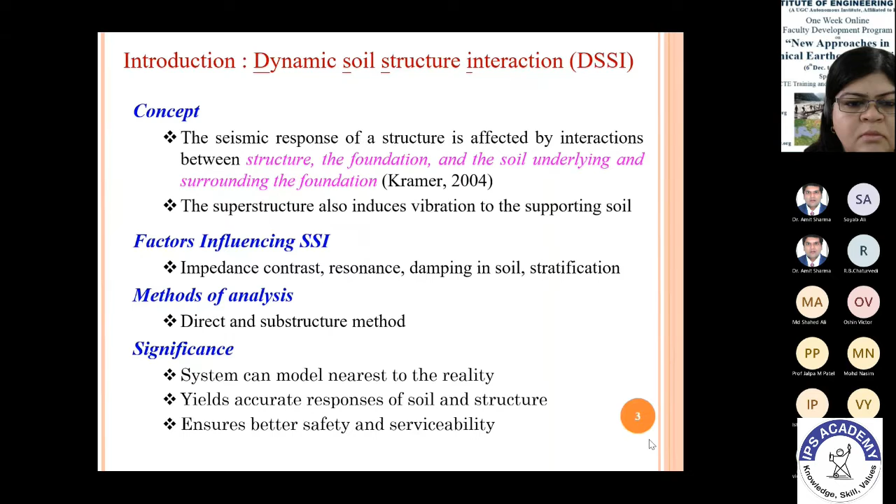The top floors failed because of the inertial effect. This is the same earthquake as the Hanshin Expressway case, a classical example where the effect of soil-structure interaction can be seen very distinctly.

Mostly medium height structures of 10 to 12 story buildings on soft sediments were affected, where the period increased from 1 second to 2 seconds. The structures could have performed well at the 1 second period for which they were designed, but when extended to 2 seconds, they could not perform well.

That means the wave characteristics changed, so the duration in this particular event at that location, because of the interaction with such soil, the duration parameter of the input ground motion increased, not the amplitude part.

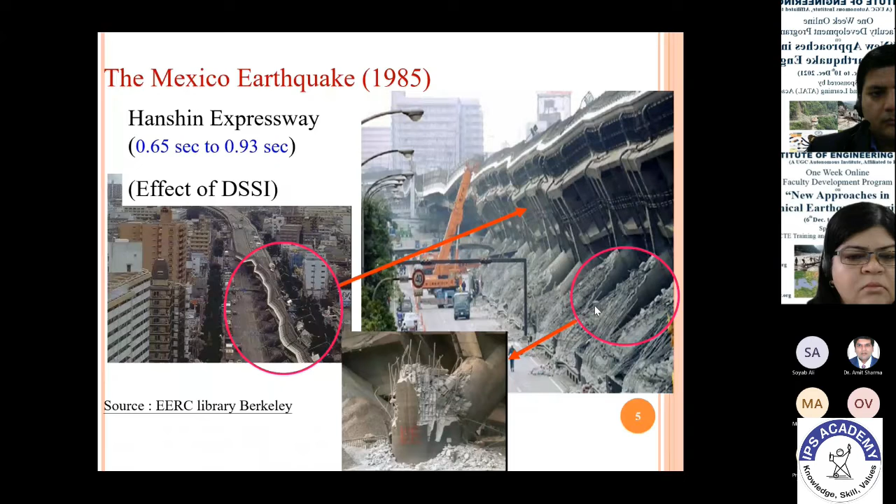The Kathmandu Valley is another classic case for damage studies, not only for asymmetrical structures but also for topographical features. Structures on the crest portion of mountains or hills had moderate damage, whereas structures in the valley portion had severe damage.

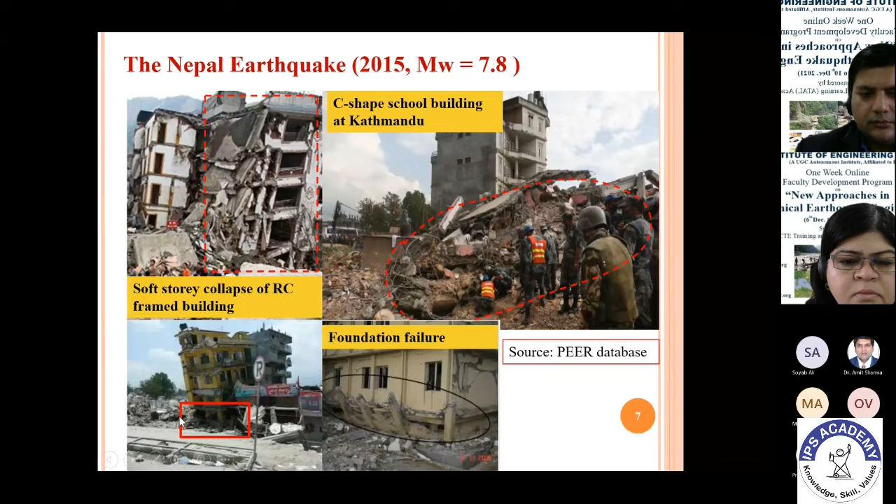These are structures in the Kathmandu valley part. This is a soft story collapse of an RC structure. You can see the kind of damage it had, how the foundations failed, and complete collapse. This is a school building, again in a C shape, with soft story failure of the frame structure. So this is up to the superstructure part.

Let's see some of the failures, especially with pile foundations. When we have soft sedimentary strata, people go for deep foundations, like pile foundations or pile raft foundations. So let's see how the piles behave.

During an earthquake, there's vibration in the foundation, and after that, gap formation occurs. This is a simple thing - even if you take a small pencil and put it in clay or any soft strata, then do some lateral displacement on top, after a few motions, if you leave it, there's a gap formation. So after an earthquake you also get this kind of gap formation.

If a gap is formed, the pile is not in contact with the soil. When the pile is not in touch with the soil, how do we transfer the load? Mostly these piles are friction piles, because in areas with thick or soft sediments, where we expect soil amplification or other geohazards, bedrock is very far, so these are mostly friction piles.

So you see here, these are not columns, they are piles. You may be surprised what happened to the soil around, because the pile should be embedded in soil - it has been completely washed out due to lateral spreading. It is liquefied, and because of topographic variation, the material has been completely washed away, causing these kinds of failures in the foundation.

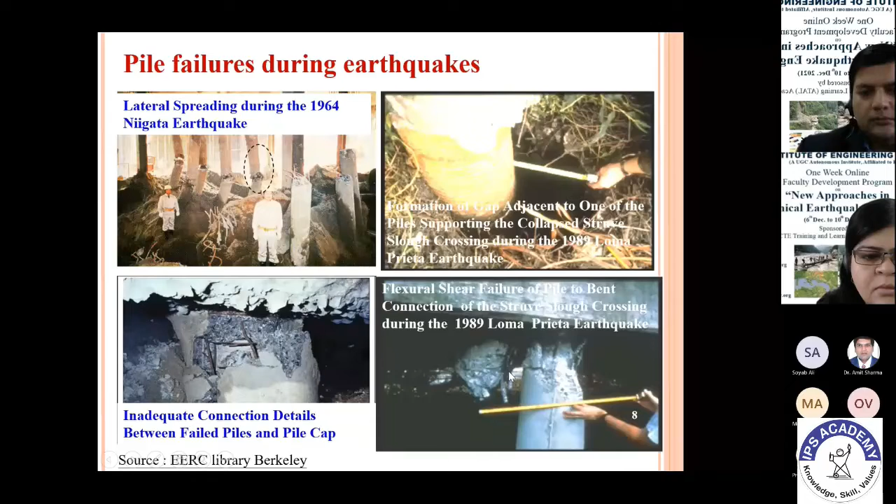So the problem here - we've seen failures for the superstructure, especially asymmetrical ones, and we've seen it in pile foundations. What we're trying to do is study how these asymmetrical buildings supported on pile raft behave, because pile raft is something we don't have an IS code for right now.

We follow Poulos's papers or book for design, but it's being very fast adopted in the country for high-rise structures, because it saves a lot of money by taking advantage of both types of foundations. The raft is mostly load bearing, and the pile is a settlement reducer. In such soils, we may have differential seismic settlements, which can be handled by piles. And since there's a lot of inertial forces due to seismic activity, that can be handled by the raft. That's the advantage of the pile raft foundation system.

To address this problem, we considered an asymmetrical building, specifically geometrical asymmetry, since these are common types of asymmetrical buildings built in most areas, especially in Gujarat, Delhi, or other seismic areas. We considered these foundations on pile raft, and started working on understanding the behavior with different kinds of soils, layering, and soil properties, especially shear strength parameters and earthquake ground motion. We looked at the most controlling factors in the overall response of this dynamic soil structure interaction problem.

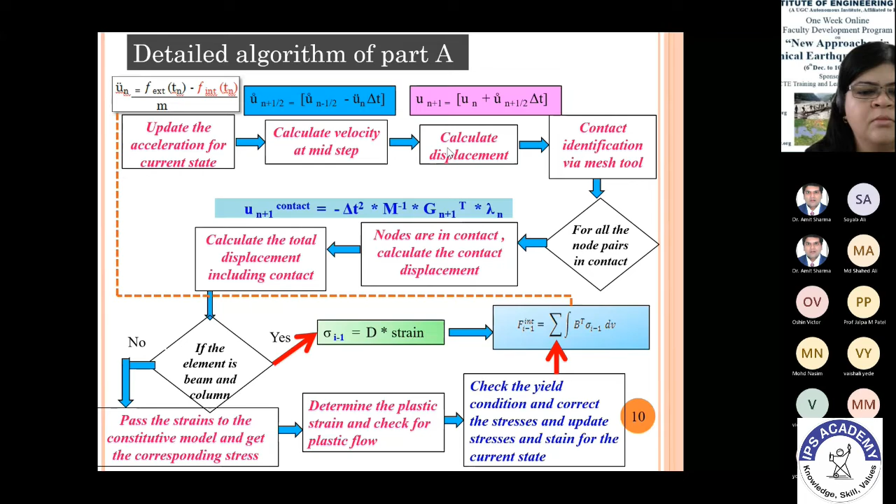So coming to the details of the numerical model, we used 8-noded brick elements for the raft, soil, and the pile, and 2-noded beam elements for the beams, columns, and the superstructure.

Coming to the modeling techniques, we use node-to-node contact at the column-raft joints. Columns are completely embedded in the raft, which acts mostly as a rigid connection. For the soil, as I said, we considered absorbing boundaries, wherein a wave passing through will not have any reflected part of it. It just passes by, because waves are passing through any boundary.

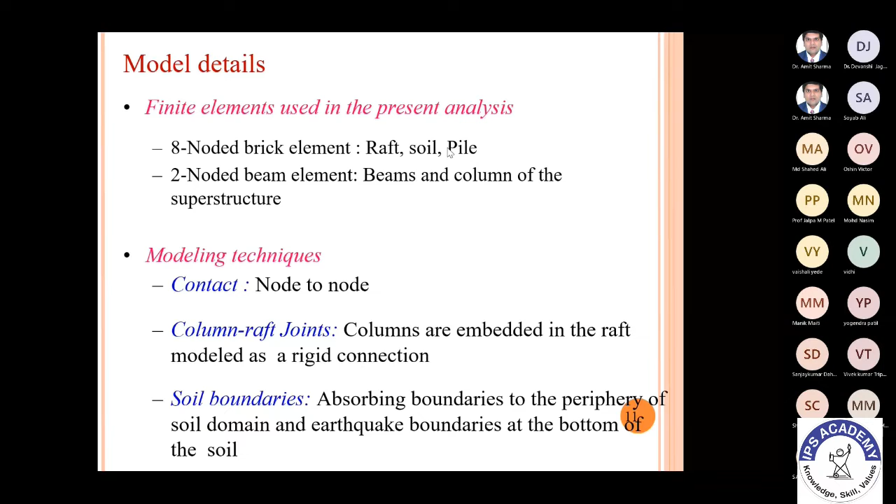If you don't consider it as an absorbing boundary, there is a possibility of reflections, and the reflected part of the wave can come again. So to make the problem simple, we generally assume it as an absorbing boundary. And then this is how the program works.

You give inputs in text files, like geometry, nodes and elements, contact details, boundary conditions, material properties, and constraints. Then load data with respect to degrees of freedom, and then it goes into the analysis, so that properly it can be plotted.

As I said, when you develop any numerical model, without validation it is of just no use. So validation is such a crucial part. We did validation using the already available data from the literature.

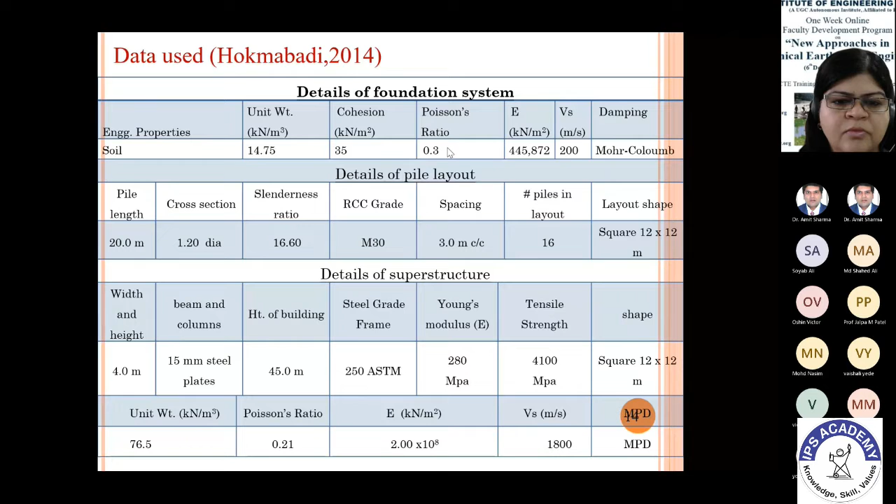Hokmabadi did both experimental work using a shake table and numerical work using FLAC. These are the data details of the different things he has taken, like foundation details, engineering properties, and the piles and superstructure details. We have considered the same thing from his published work.

This is our finite element model for validation. He has used the same 45-meter structure which is on a pile foundation. So this is the details of the structure, and we model the same thing which he has done. This is actually the scaled down model that he used in the shake table test.

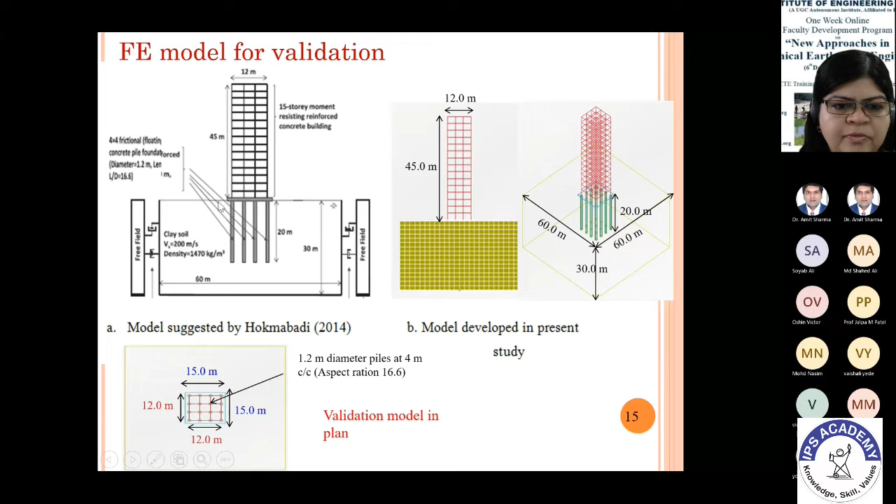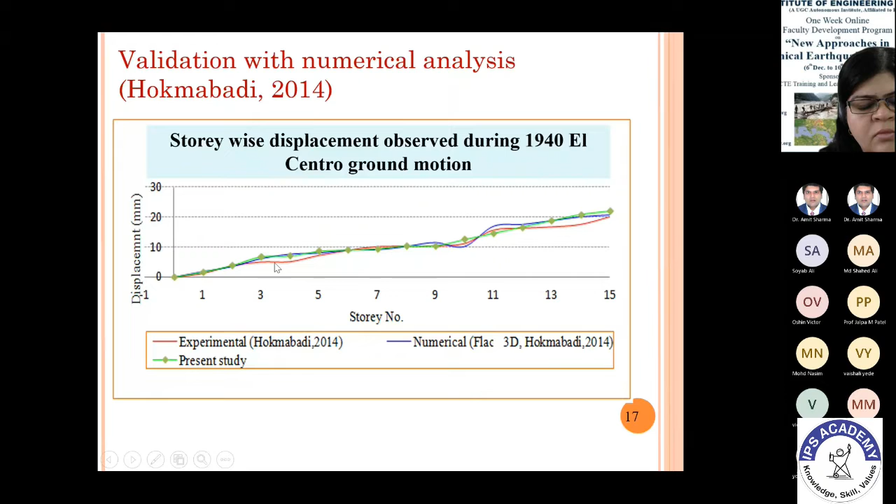These are the comparisons or validations which we have done with our finite element model against the available literature, which used FLAC as well as the experimental part. So this is our finite element model shown here.

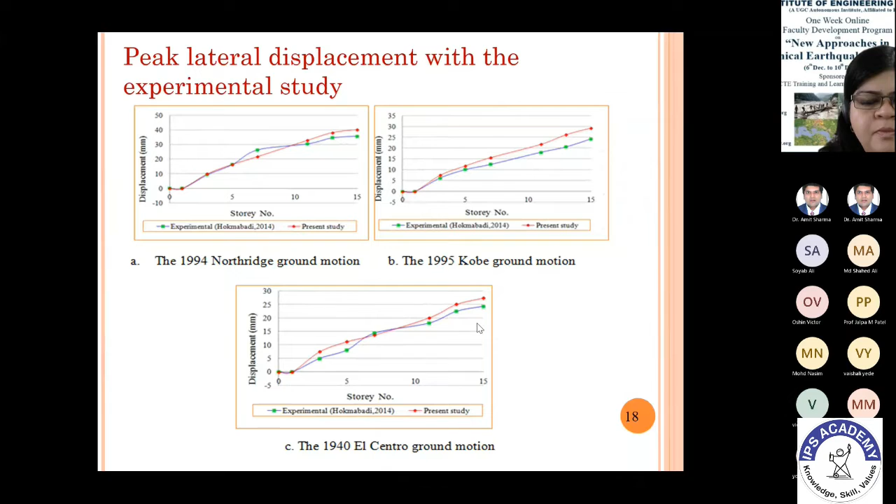So this is for the different ground motions. We try to compare the experimental versus our study, showing the different ground motions, because we just want to understand the validation. When you want to carry out validation, you have to consider all the parameters the same as they have done in the experimental work or with FLAC.

Then lateral displacements with our study—this is a comparison of the displacements with respect to their experimental and FLAC analysis. When we see that experimentally, our code has almost 10 to 17% variation, whereas numerically it was just 5 to 8%.

So it was very much acceptable. This is actually with the commercial FLAC, so we thought it's fine. The only drawback at that time was that the computation time was very huge. It was taking so much time for one model to run. That was the major drawback we had at that time.

Anyway, to start our own work after validation, we started with three geometrical asymmetries: L shape, C shape, and T shape. And for comparison's sake, we considered a rectangular building, which is generally common. All the structures have the same plan area, 27 square meters, and a 10-story height.

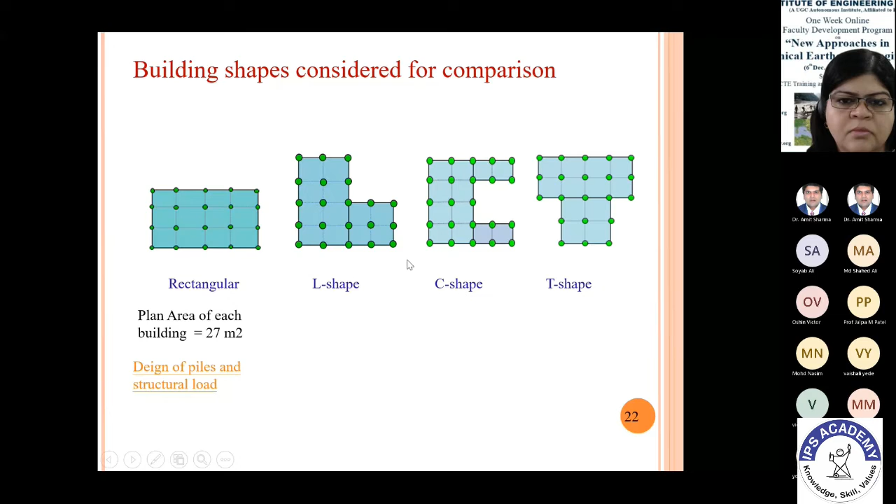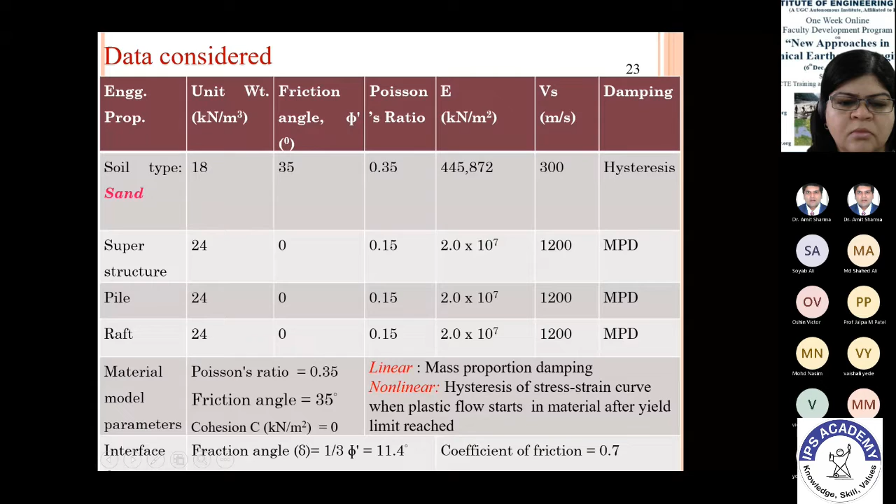Then we wanted to start with our Bhuj earthquake. But the full Bhuj earthquake we can't give because, as I said, the computational time was so much. So we considered only the major part of the ground motion, because the model takes a lot of time. If I give the entire ground motion, it takes so many cycles, and it takes a lot of time for the analysis to complete. So we gave only 15 seconds of the predominant ground motion as input, and started the analysis.

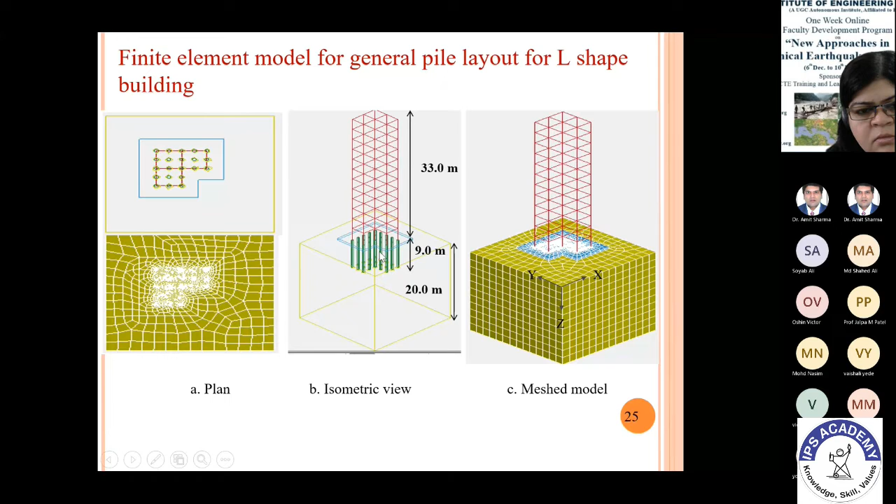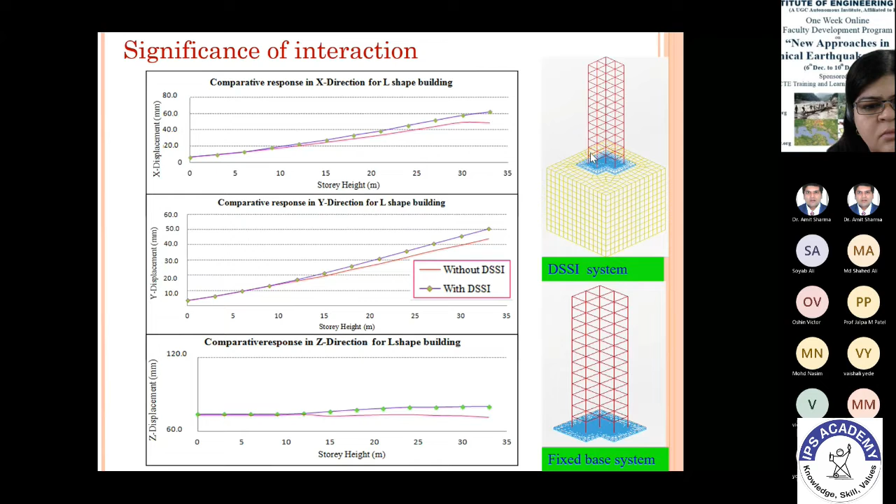This is for the L building. You can see here, as I said, a 10-story height; we designed the piles for it and then started the analysis. Similarly for the T and C also. To start with, we began with the general case, without any SSI, the fixed base condition. Obviously, there is a difference, so we have to carry out SSI analysis.

When we did this for response comparison, we considered the L-shape building and started noting the X, Y, and Z displacements at different nodes in the building at different story heights as well. This is at the top of the structure at a particular node. At different nodes, we try to see the response so that we can understand which is the more critical node in a particular building.

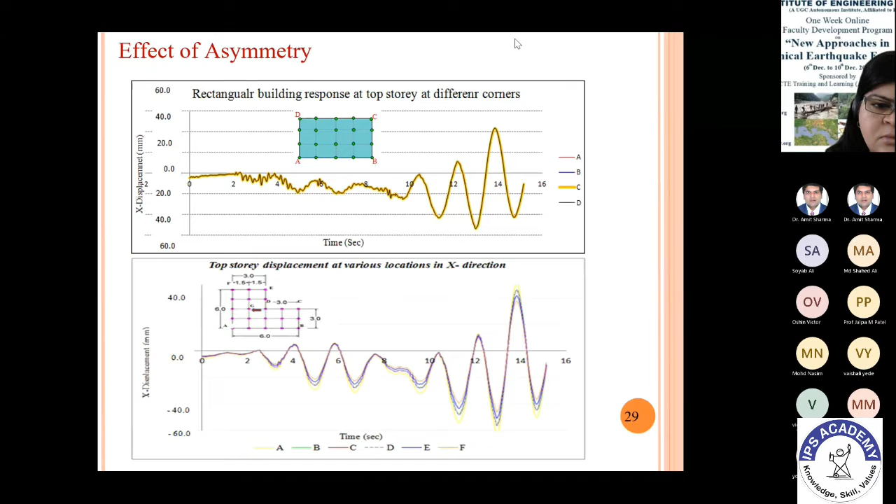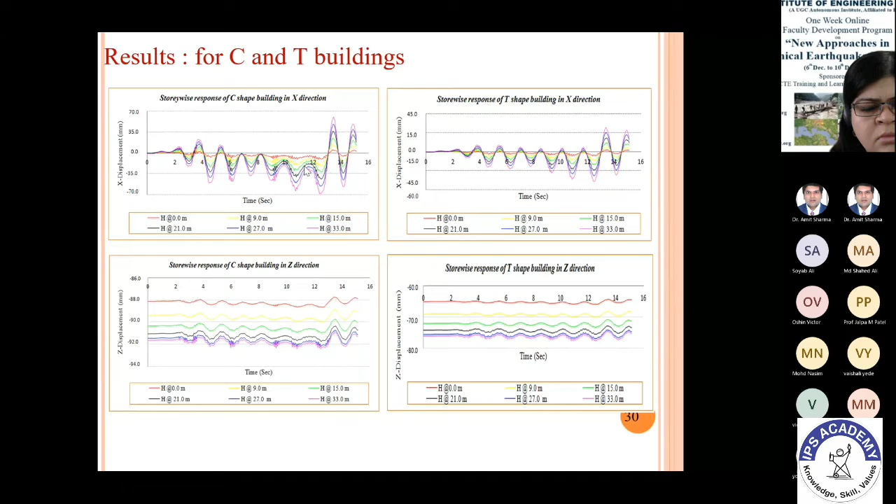So many results are there because we started comparing the responses in all three directions at different nodes and different story heights. You can see here, this is for a C-shaped building in the X direction at different heights, from the ground floor to the top floor, showing how the X displacements vary. We tried to understand the overall behavior of the superstructure under these particular conditions of analysis.

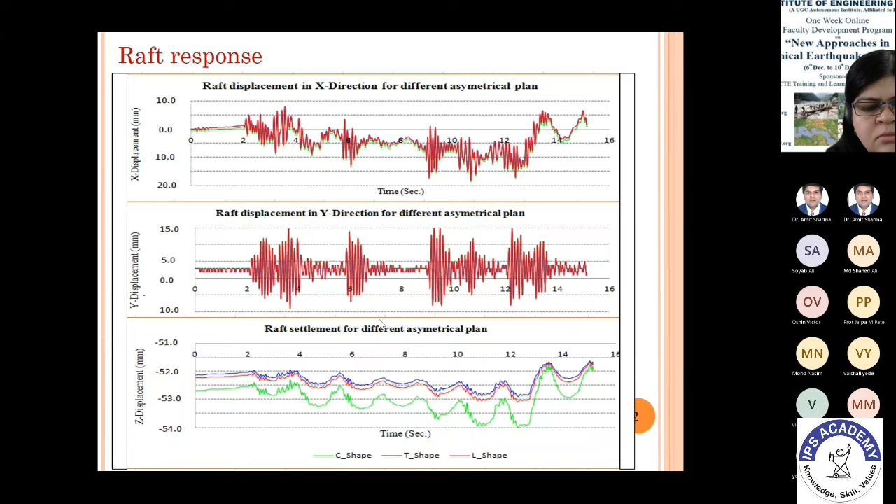For the pile response, we looked at the connection between the cap, that is the raft, and the pile, which we call the pile head, the center of the pile, and the bottom part of the pile. We want to see how the displacements vary along the length of the pile in all three buildings. This is for the C. We can also calculate the settlements.

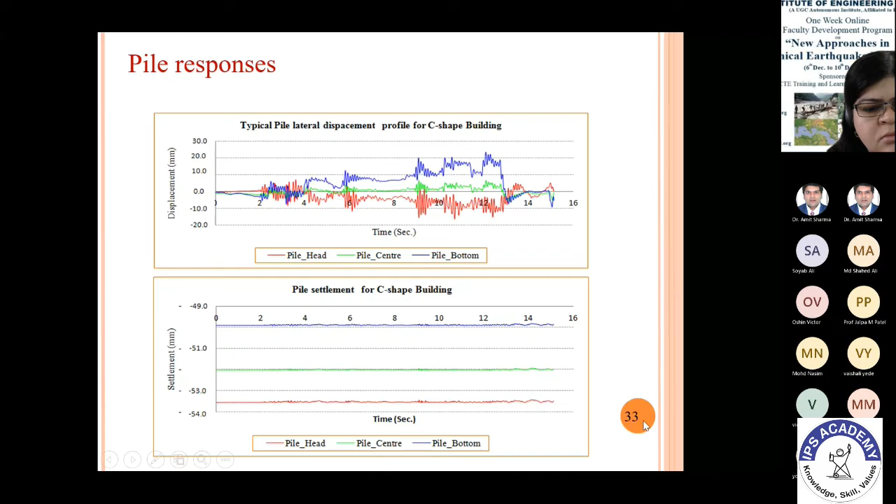So to conclude from the first part of the analysis, the numerical code or the implementation of this DSSI problem is really very challenging. I think the student has really done extremely well in developing her own model.

It was very challenging because we need to incorporate several complexities, like interface effect, which we have adopted in our model, earthquake and viscous boundaries, structure-foundation joint treatment, and soil nonlinearity through the material model. So we could consider all the complexities that are involved with the DSSI analysis.

That's why the code results are very close to the experimental or the FLAC analysis in the validation part. The validation showed variations ranging from 6 to 12% maximum, which is very much on the safer side. We conclude that the proposed numerical soil-structure code is a valid method for simulation with sufficient accuracy with acceptable limitations.

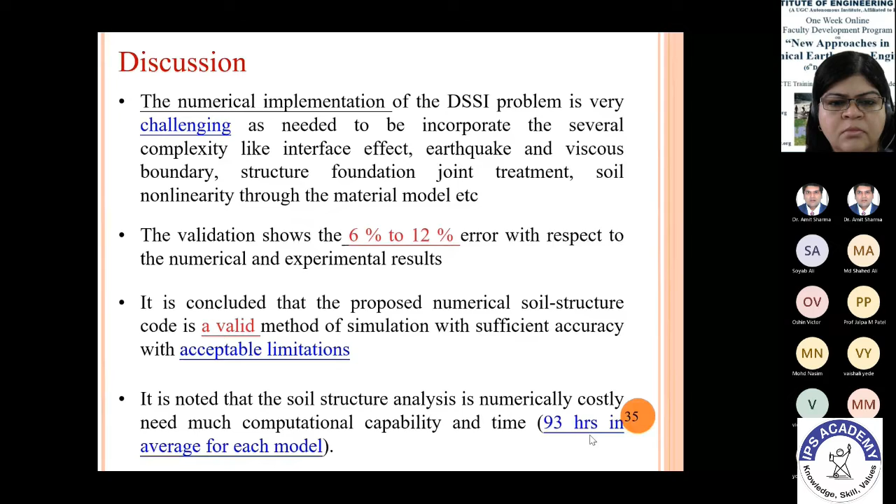We also observed that it takes so much time; the computational capacity was not that high. As I said, initially it was taking 93 hours just to run one model. You have so many different combinations to run that we cannot complete the work in 3 or 4 years. So we decided to improve the computational efficiency first. I'll explain how we have done that.

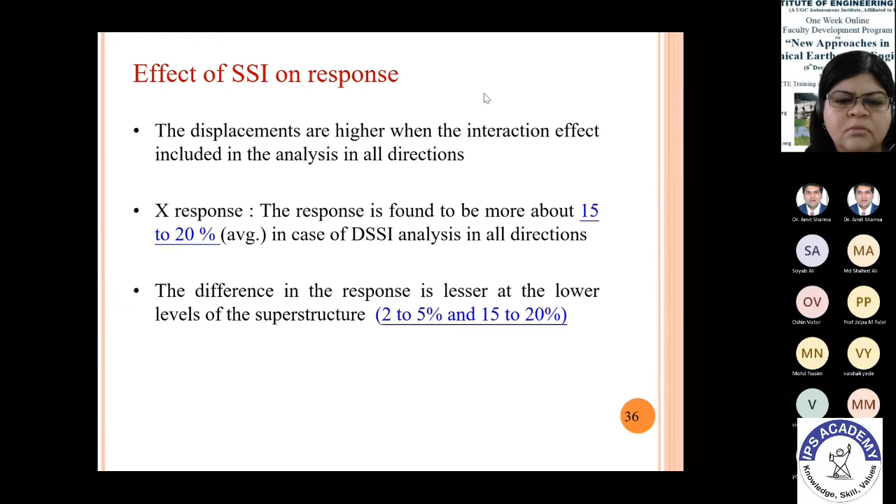Displacements are higher when the interaction effects are included in the analysis in almost all directions, obviously, because we have considered the overall effect of the soil, substructure and superstructure. The response is found to be about 15 to 20% more in the case of DSSI analysis in all three directions. The difference in response is lesser at the lower levels of the superstructure compared to the top layers at critical nodes.

Coming to the effect of asymmetry, the rectangular building shows lesser response compared to the asymmetrical ones, obviously, because symmetry plays a major role in seismic resistance. The C buildings have higher response compared to the rectangular, and the L and T buildings are also higher by almost 20%. The foundation lateral displacements and settlements are nearly the same for all the buildings under the same earthquake load. This is one of the interesting observations.

Irrespective of the superstructural asymmetry, the foundation lateral displacements and settlements do not show any variation. I think this is one of the very good outcomes of this analysis. The structural hazards are more associated with the structural asymmetry, whereas the foundation is not responding differently for different superstructure asymmetry.

As I said, the code is taking a huge amount of time, so we need to improve its efficiency. There are n different numbers of piles that we got after the design of all the 4 different structures. So we want to adopt the equivalent pier method, proposed by Poulos. It says you can consider a single pier which is equivalent to the n number of piles supporting a structure.

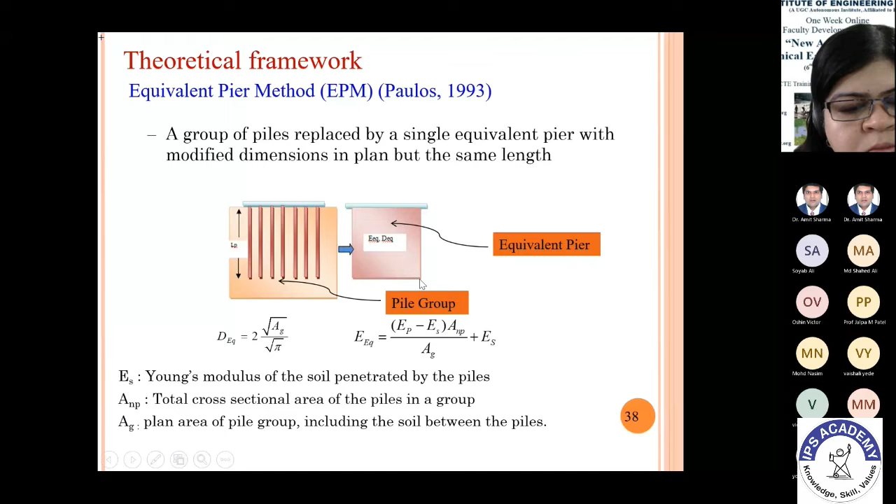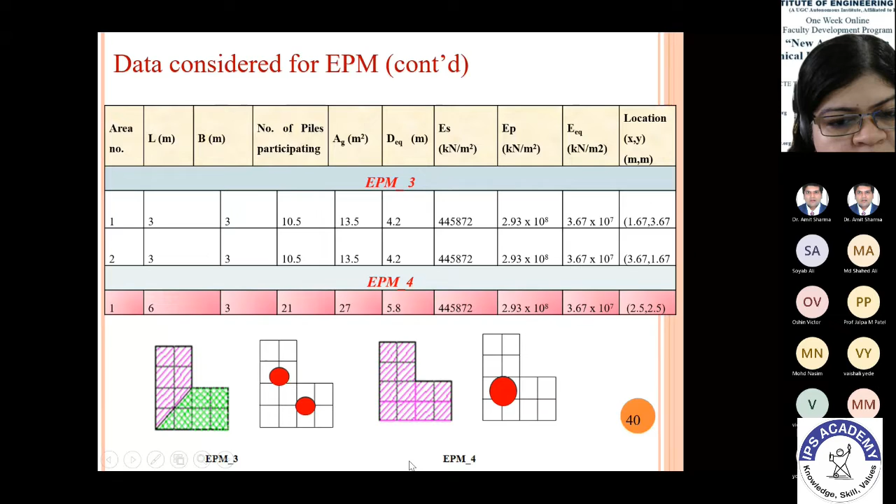So I can consider the entire piles, all the piles which are participating for an L-shaped building, and model it as one equivalent pier. So which one to follow? So in the starting, we want to understand the effect of EPM methods also. Let's see one L-shaped structure, assuming one particular asymmetrical structure, with all n number of piles and all EPM 1, 2, 3, 4 methods. So let's see which one is closer to the general configuration of n different piles. So that's what we want to observe.

So then we have done the calculations for all the 4 EPMs. If you see here, these are the first areas 1, 2, 3, and for each area, of course, L and B. Then the number of piles participating. Then we will be calculating the equivalent pier properties, and its location can be calculated. Then we can model that. Similarly for EPM 2, EPM 3, and of course EPM 4. So these are the different EPM models.

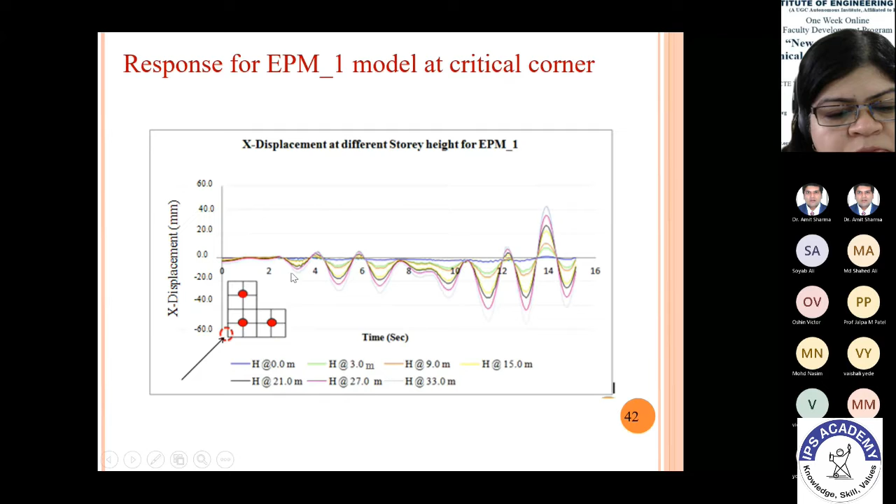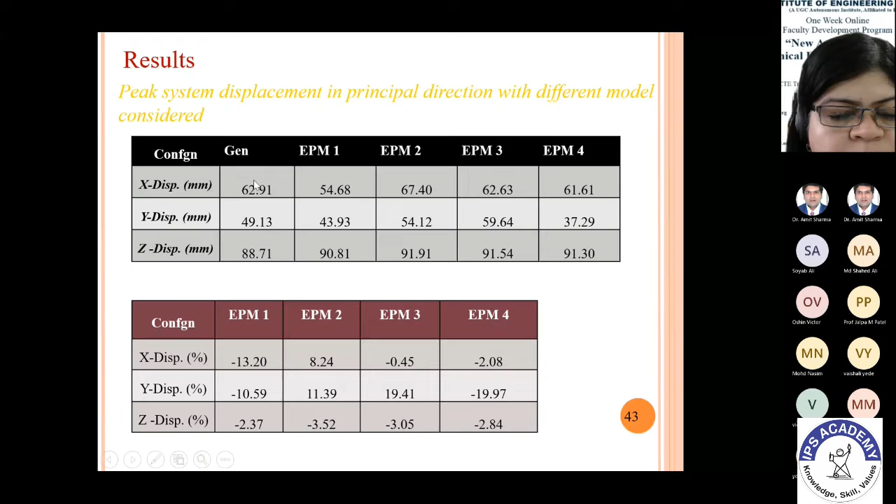So again, we started the analysis. This is the response for the first EPM model at the critical corner. As I said, for the L-shaped building, this is the critical corner. So rather than observing at all nodes, we decided to understand the behavior at the critical node at different heights. Then we started comparing the 4 different EPMs that we adopted with the general configuration. These are the displacements in the principal direction, and the percentage displacements in 3 different directions that the 4 EPMs give when compared with the general one.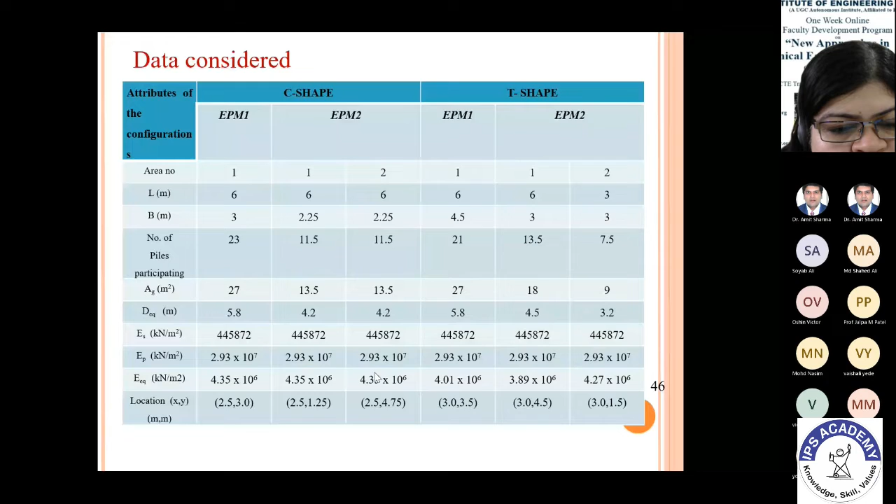Then after achieving this computational efficiency, we decided to do a parametric study to understand which are the more controlling factors, especially when it comes to DSSI. Because I'm from a geotechnical background, I'm more interested in the soil part. So we started looking at 3 different soils: C soil, Phi soil, and C-Phi soil, to see which one gives a better response, at least to have an understanding.

Then we want to see the effect of different ground motions. We have considered 2 Himalayan earthquakes, the 1995 Chamba earthquake and the 1999 Uttarkashi earthquake. In addition to that, we have taken the Bhuj earthquake, because Bhuj is so important; it was such a big eye-opener.

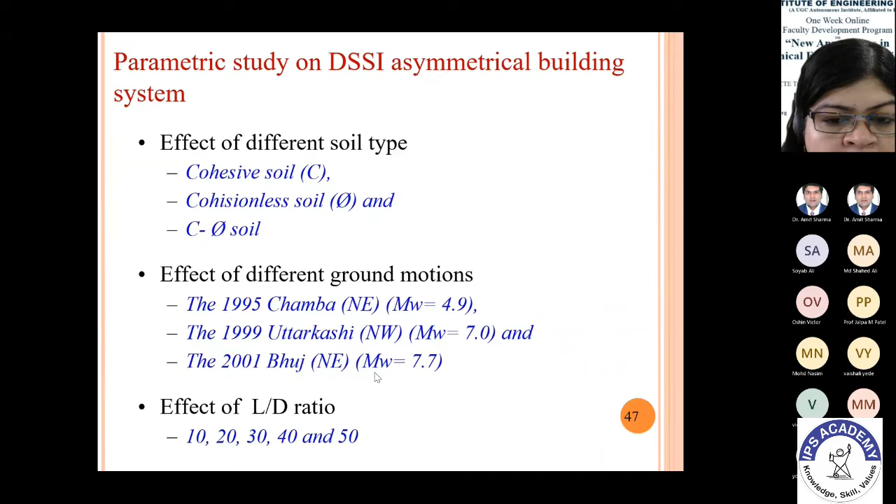Then the L/D ratio of the piles we have also tried to understand, because geotechnical design is not like structural design; it's not prescribed. A lot of judgment goes in, and if you give the design to two people, they may come up with 2 different designs, especially with foundations. So we want to understand different L/D ratios, from 10 to 50, and see the response of the superstructure considering SSI. These are the soil properties for the 3 different soils: C soil, Phi soil, and C-Phi soil.

Now we started our analysis to understand the displacements of different nodes for all 3 structures. These are the overall results of the analysis. This is the superstructure response, and this is the pile response for the 3 different soils.

Actually, later we have put up this 2015 Nepal ground motion also, which I am not putting here. It is published in the Journal of Asian Earth Sciences. And then this layered thing also: here we started with a homogeneous soil, like completely C soil, completely Phi soil, or completely C-Phi soil. Then we started looking at 3 different layers of 3 different properties, 3 different thicknesses, and you can play now with changing the different parameters and try to understand that.

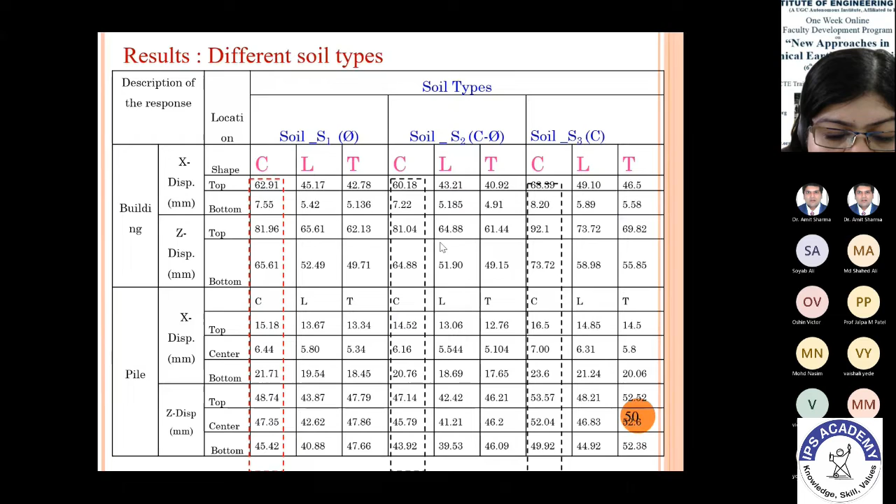So when we see this, you can see the C building is having higher response in all the 3 soils, S1, S2, S3, when compared to the corresponding L and T. So to see the effect of the supporting soil types, that is the 3 different soils we considered: peak displacements are varying in the range of 12 to 15% for these 3 different soils, S1, S2, and S3. Whereas the C-type soil, S3, is showing more transfer of vibrations to the superstructure compared to the C-Phi and the Phi soil. So this is one very interesting takeaway from this analysis. The same observation has also been found for the remaining 2 structures as well.

Then the C building response was higher. In almost all the analysis, what you observe here is the response of the C buildings is much higher when compared to L and T, with almost all the changes of parameters. You change anything, but the C response is higher. So that means the geometrical asymmetry is very strongly controlling the overall response of the superstructure. But the superstructural asymmetry is not controlling much the foundation response. Whatever the asymmetry of the superstructure, the foundation response is completely depending on the substrata.

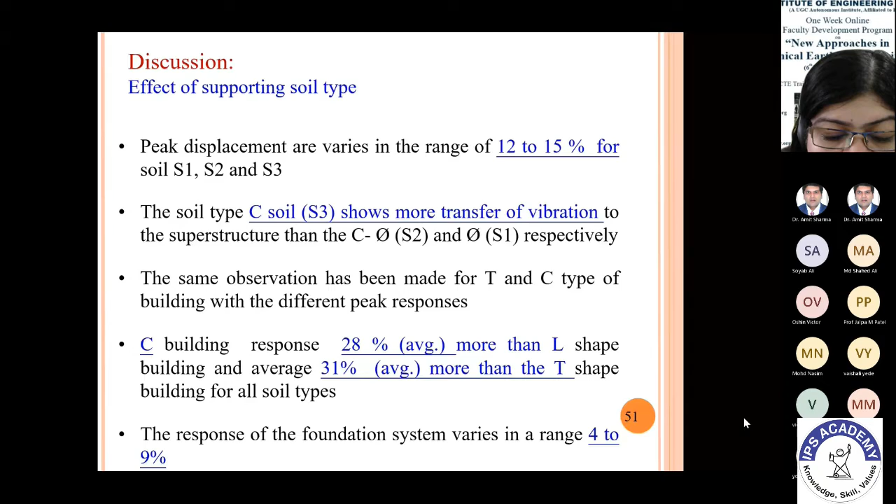So it is more than the L-shaped building, and almost 31% more than the T-shaped building. So the response of the overall foundation, including pile and raft both, is ranging from 4 to 9%. So these are the 3 different ground motions we have considered.

We have specifically considered two different Himalayan earthquakes. Why? Because if a strong event happens in the Himalayan seismic gap, there is a huge effect on most of the Indo-Gangetic plain, because of far field effects. So Himalayan earthquakes are not only hazardous to that region; they can be felt even in parts of Bihar, Delhi. They also pose a hazard because of this far field effect. So what we want to understand is, if an earthquake happens in Chamba and I have such an asymmetrical building on a pile raft in Delhi, how does that behave? How will my structural response be for a far field earthquake rather than a near field earthquake like Bhuj? So this is the idea of considering this part.

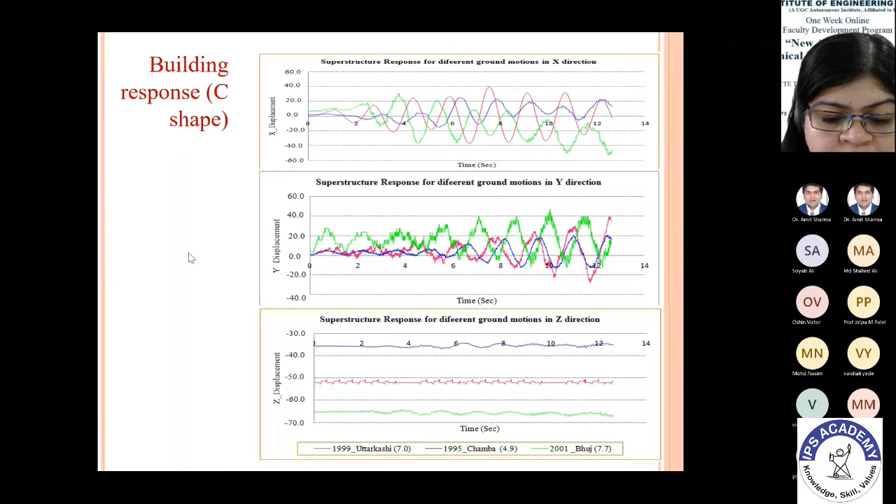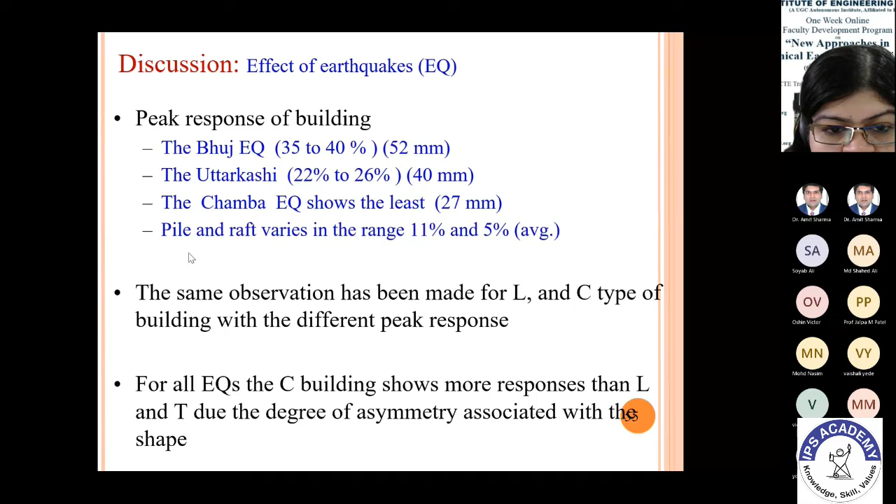So when we look at the response of the superstructure, the Bhuj earthquake, because it's a near field effect, has higher response, 52 mm. Of course, you cannot compare two different earthquakes. Even earthquakes of the same magnitude, you cannot compare. So there is nothing like comparison. The only thing we are trying to understand in this analysis is the effect of far field ground motion on asymmetrical buildings. That's all. So for the pile raft, it varies from 11 to 5%. The same observation has been made for the two structures, L and C shape also, with different peak responses. So for all the ground motions, C buildings are giving more response than the remaining two asymmetrical structures considered in this study.

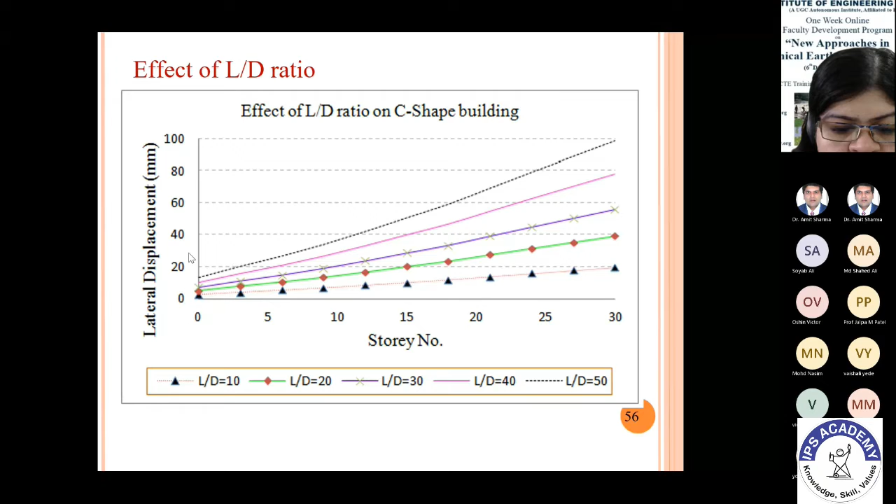Then the last one, effect of L/d ratio. As I said, a lot of judgment goes into geotechnical design. So what we did is we varied the L/d ratio from 10 to 50, and again carried out the analysis. So lateral displacements in the piles. This is for the C-shape building. You can see as the L/d ratio is higher, the lateral displacements were also higher. So this is a very distinct observation we could make. We have seen similar response even for the other two buildings, L and T. So this is the overall analysis at the center of the pile.

So to conclude from this part of the analysis, for larger diameter, the displacements were found to be less, which is the lower L/D ratio, whereas for the smaller diameter piles the response is higher. So the diameter is less, L/D ratio is higher. The pile length in contact also contributes to the developing of the contact displacements. That is, the contact area for L/D ratio of 40 is less than 20 and 30 respectively.

So the pile soil interaction contributes to the response. So that is the observation we can make from this. Then the least response was observed when the L/D ratio was lesser, that is, the pile diameter is higher, and for diameter less, L/D ratio higher, we got the higher response.

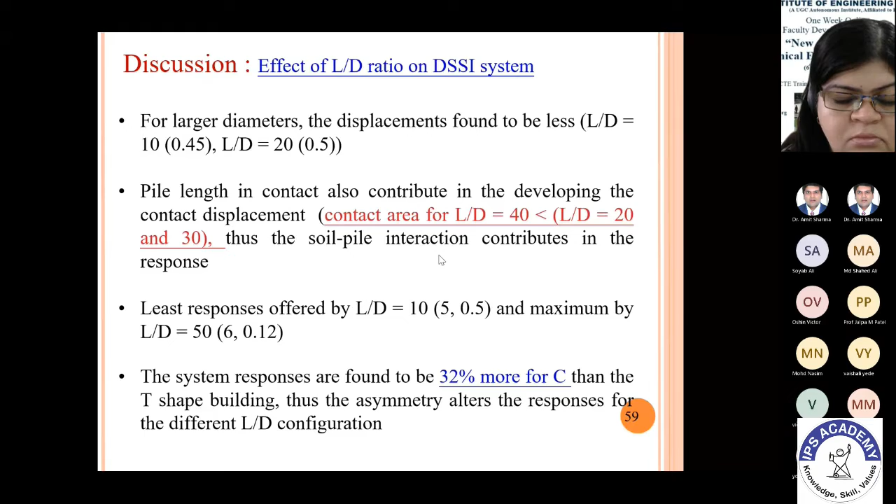So the maximum response was found to be 32% more for C-type buildings, followed by the T-shaped buildings, and then later by L. So that means that the geometrical asymmetry is altering the response for different L/D configurations also. So with this, I come to the conclusions part.

So the overall conclusion from this research is that the numerical implementation of the dynamic soil structure interaction problem is really very challenging and interesting as well. The only thing is you should have a strong mathematical background and a little bit of coding knowledge. And the DSSI code shows good agreement with the experimental and numerical results, not only the validation with the published literature. After this we started a little more work in continuation.

Considering the Nepal earthquake, the specific C-shaped building which completely collapsed, which I showed you in the photographs, has been considered, and of course we assumed some material properties. It's not like we have the actual material properties of the structure. So we started understanding the damage pattern, doing the analysis and how to simulate the scenario of the earthquake. That's a small piece of work which has been a very interesting part.

And the effect of interaction in analysis alters the system characteristics and the overall response of the building. The asymmetrical system is different from the symmetrical configuration, and the degree of asymmetry associated with geometry is actually controlling the overall response of the superstructure. So we have to be very careful when considering an asymmetrical structure, either geometrical or load asymmetry. Of course, we didn't consider load asymmetry in this analysis, because shape asymmetry is something which is seen very commonly.

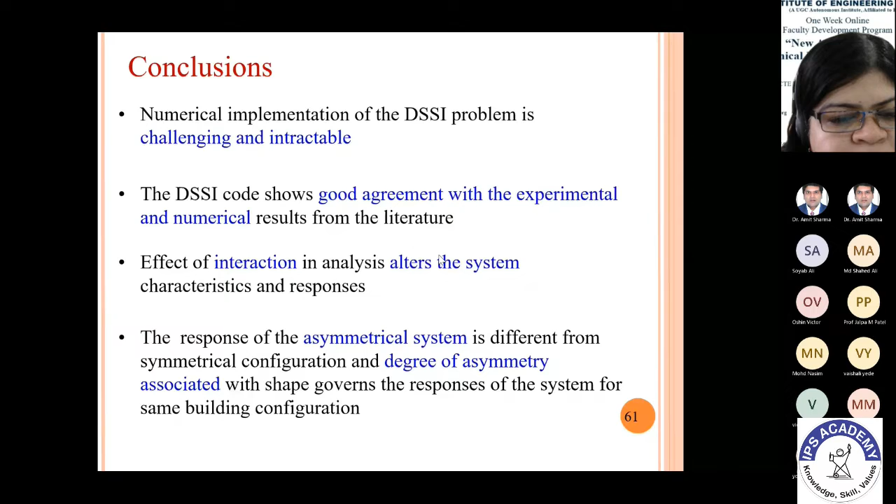And the EPM model we adopted proves to be very numerically competitive. It saves a lot of time. And the interface effect can be made robust in the EPM model, because rather than modeling n different piles, I just model one single one. So it enhances the simplicity of the complex DSSI code, and accuracy was acceptable in relative terms, so it can be applicable for the asymmetrical pile group. And earthquake characteristics, soil characteristics, and foundation geometry play an important role in the overall system response.

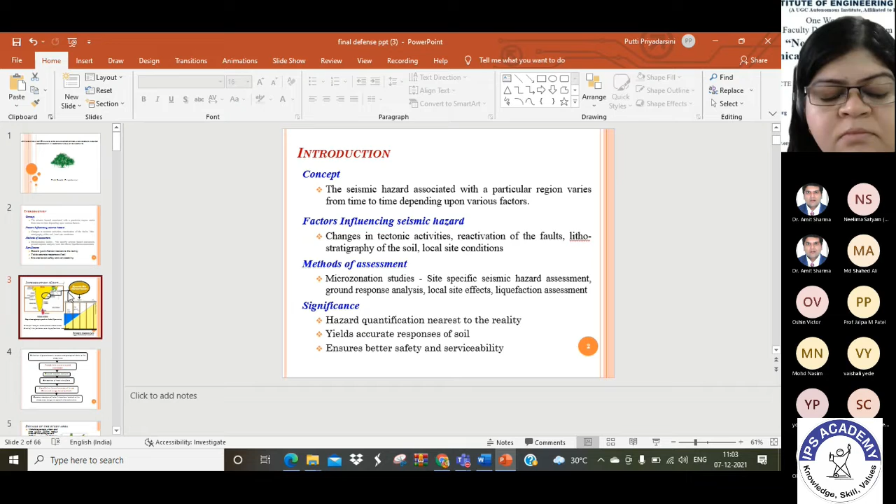That is why we chose this particular study area, which is already in zone 2. There are two parts in the study: the first is dynamic site characterization, and the second is how we apply dynamic site characteristics to realistic problems, like a port structure - a pile supported wharf, which you can see.

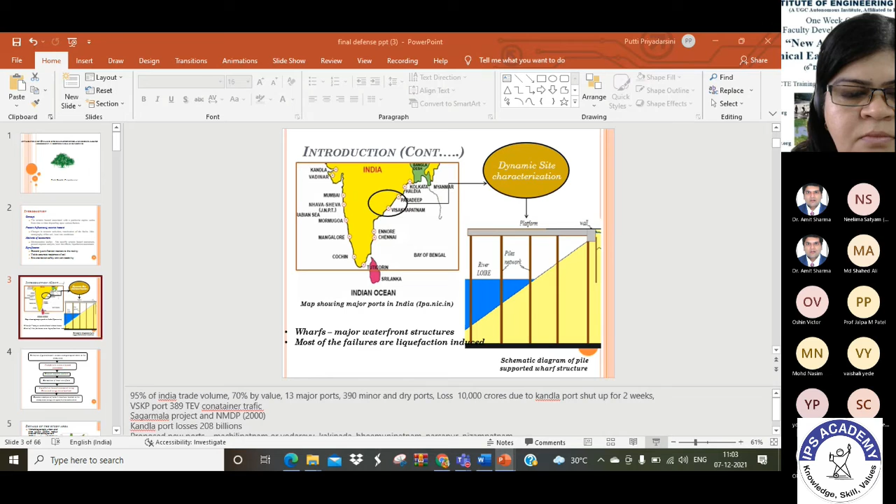This pile supported wharf in Vishakhapatnam area, as you can see in the schematic diagram, was damaged during the 2004 Great Indian Ocean earthquake. Vishakhapatnam port experienced high tides at that time, and this wharf was damaged. But since there was no knowledge of earthquake geotechnics or liquefaction studies at that point in time, the exact reason for the failure is unknown.

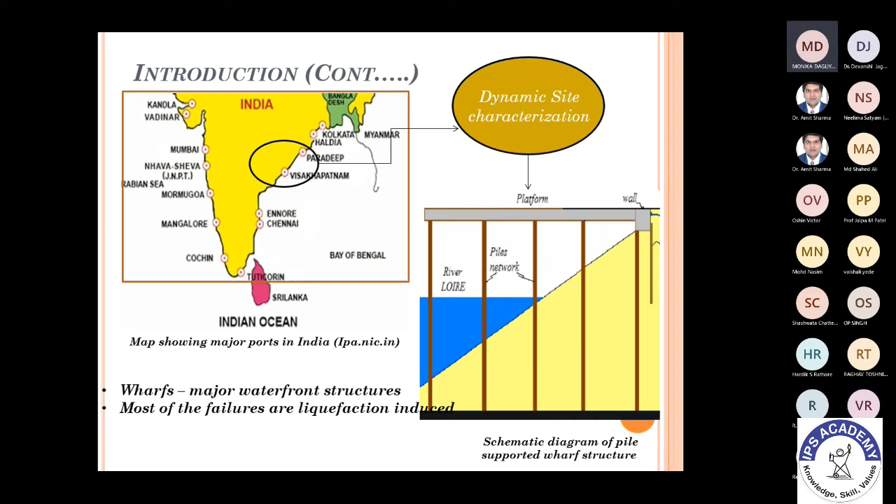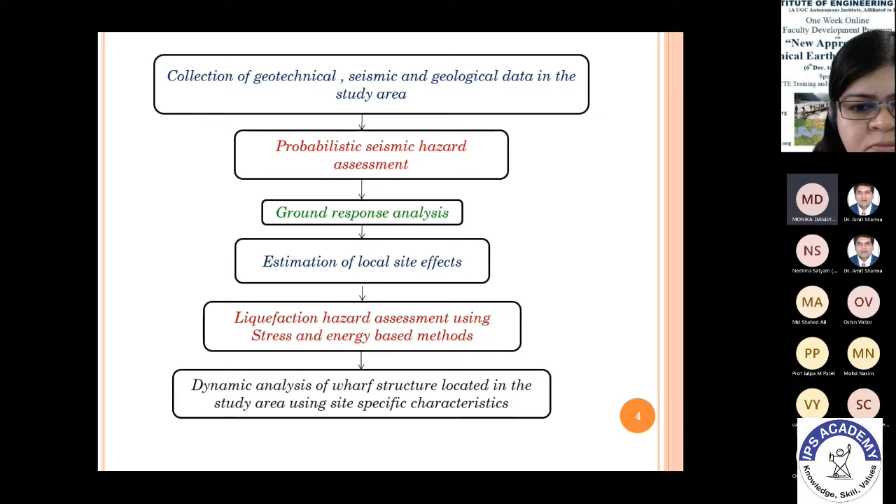These are the details of the study area, Vishakhapatnam urban, and we took around a 300 kilometer radius around Vishakhapatnam for seismic hazard assessment. This is because there are many small ports around this radius, and there are also many highly active faults which could potentially cause earthquakes in the future.

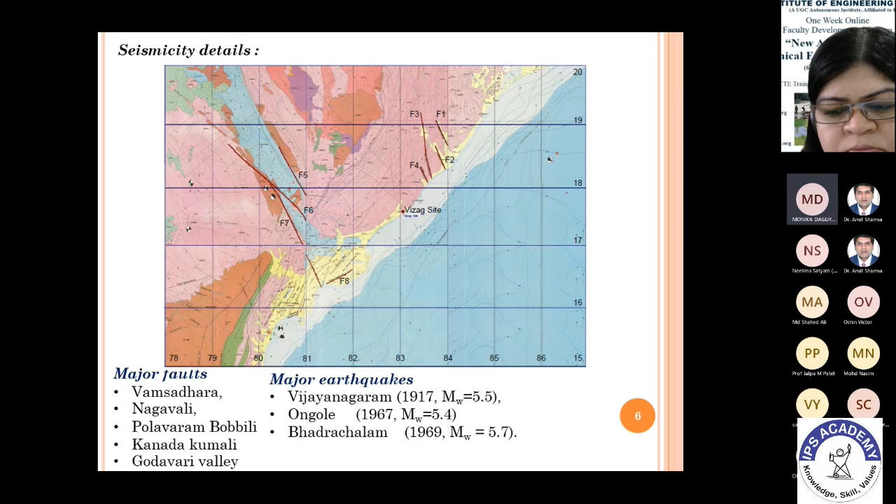Now coming to the seismic hazard assessment, before going into the details, I want to let you know we have two types of seismic hazard assessments: deterministic seismic hazard assessment and probabilistic seismic hazard assessment. In the deterministic one, we typically assign a maximum magnitude from a particular seismic source. It's a simple solution - we list out all potential sources of earthquakes and pick one source with the highest magnitude. That is deterministic seismic hazard assessment.

Now here the problem is, we don't know when that particular fault is going to rupture. We cannot define a particular time period - when this is going to give an earthquake of this particular 6 magnitude or 7 magnitude.

So that is why rather than going for deterministic seismic hazard assessment, we have taken probabilistic assessment, where we can exactly find out the location from where an earthquake is going to happen, and size - of what magnitude an earthquake can happen - and the effects, like how the local site conditions are going to affect this particular magnitude, whether they can increase or decrease depending upon the attenuation relationships. Site specific attenuation relationships are given by many researchers in the past, so using those, we can incorporate local site effects also in the seismic hazard assessment.

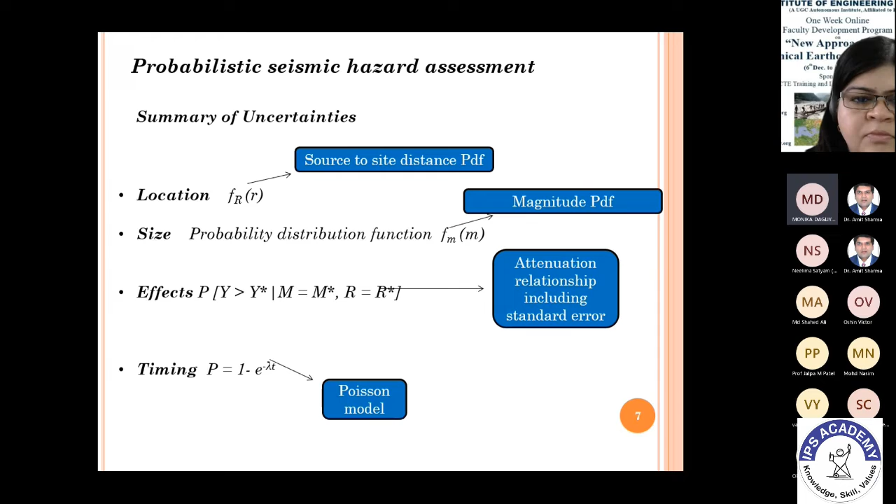So if we know all this - the approximate timing, like in the next 15 years or next 25 years, and the magnitude, and the source to site distance, whatever structures you have and whatever seismic source or fault you have - if we know the distance and the magnitude, we can design accordingly. We can go for earthquake resistant design of that particular structure accordingly. That is why we have chosen probabilistic seismic hazard assessment.

Not active fault, a reactivated fault, all the faults, as well as the point sources - point sources meaning historic, previous earthquakes. All the sources we have taken. So after considering all the sources, we have to go for seismic data completeness analysis.

See here, the problem is if whatever data you have is not complete, the results we are getting are not reliable, right? So here the main problem is the seismic stations - whatever seismic stations we have in India are not all in working condition. That is the main problem to record a particular earthquake, whether major or minor.

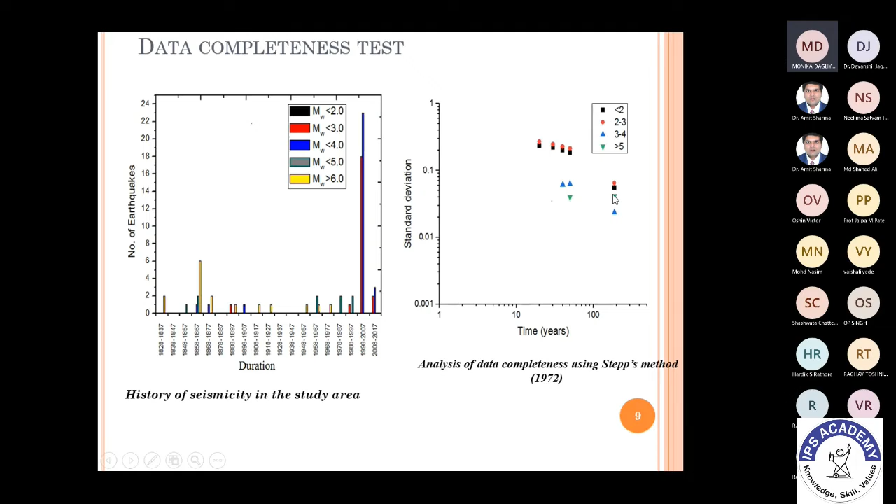So whenever we have such incompleteness, we'll take the data set in two different parts. Whatever complete data we have, we'll take one set, and the other complete data we'll take as a different set, and we'll work them out in different ways.

So here these are the major potential faults that can cause an earthquake, mentioned in this particular table: F1, F2, F3, F4 and F5, with their location and distance from the source site. Here site means we have taken the Visakhapatnam city center as a center point, and from that we have taken a 300 kilometer radius. This particular F1 is 154 kilometers distance from that center point, and this fault is 52 kilometers in length, and it is potential, it can cause a potential earthquake of magnitude 6 or higher depending upon the local site conditions.

So this is the frequency magnitude distribution plot, where we can find out the regional recurrence parameters A and B. These regional recurrence parameters can be used to find out the attenuation relationship, to form an attenuation relationship for this particular region. All the PSHA results are helpful in framing an attenuation relationship for this region.

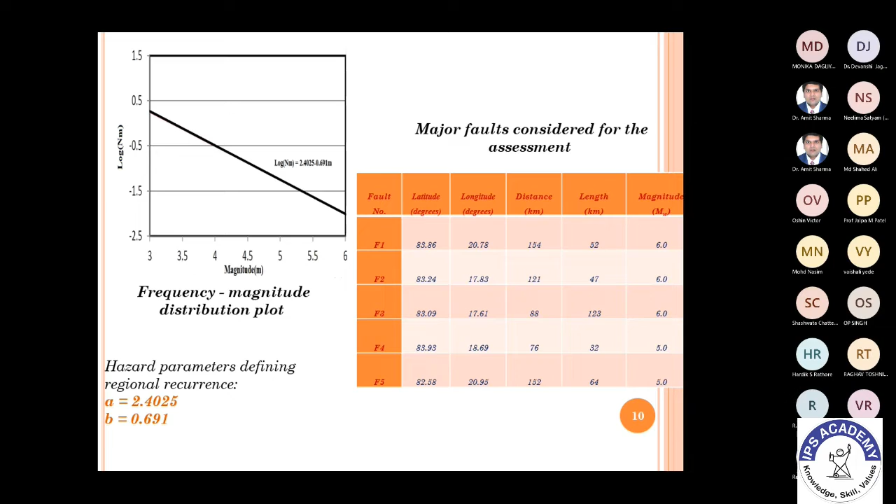We have used the attenuation relationship of Raghu Kanth and Iyengar, framed in 2006. Why we have chosen this particular attenuation relationship is that Vizag does not have its own attenuation relationship for that region. Also, this particular attenuation relationship is framed for Bangalore site conditions. Bangalore is also in zone 2 and has similar soil conditions compared to Vizag, and it is also located in South India, the nearest such place to Vizag.

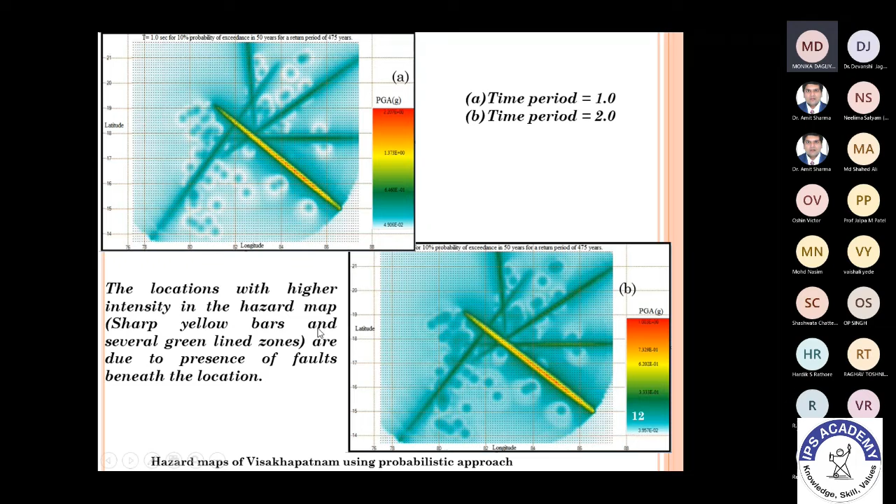So this is seismic hazard assessment. From the seismic hazard assessment, we got the spectral acceleration of 0.11 G, which is close to the IS code value, the zone factor of 0.1 G. IS code gives 0.1 G as zone factor for zone 2. From the PSHA, from the curves and all, we got it as 0.11, which is very close.

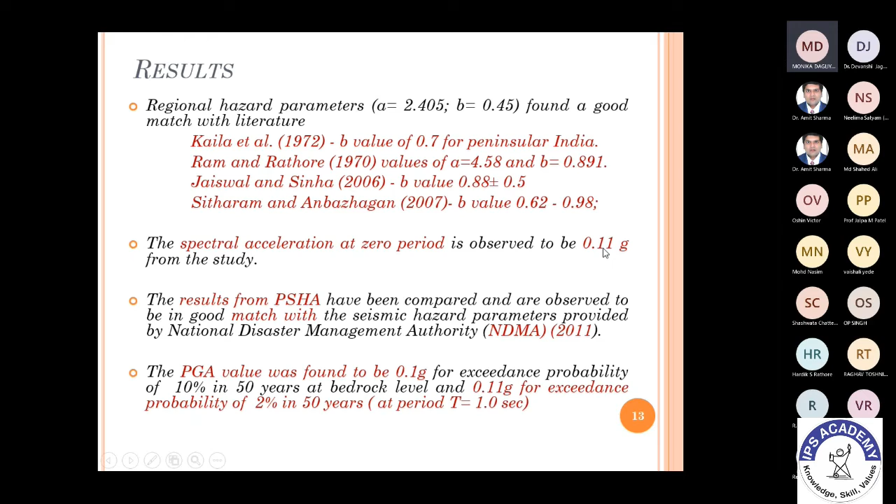So next, I am going to discuss ground response analysis. That is the response of the soil in a particular area for a given strong ground motion. So if I give an input of the Bhuj earthquake for the soil conditions in a particular area, what is the response of the soil?

Here there will be two conditions. If the soil is very soft, the soil may amplify the ground motion. That is, if I give a ground motion of 0.1 G, it may increase the ground motion to 0.14 or 0.15, depending upon the softness or stiffness of the soil. It may amplify the ground motion. When we have stiff soils, it may de-amplify the ground motion. So ground response is the response of the soil for a given strong ground motion.

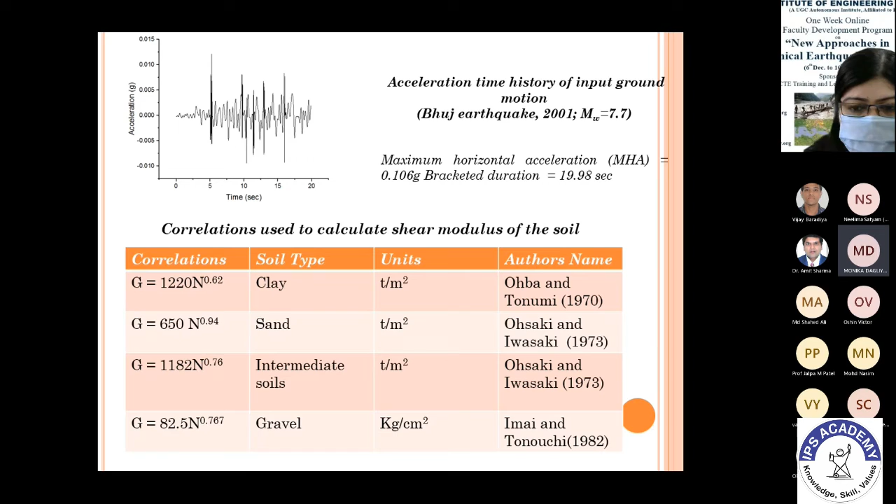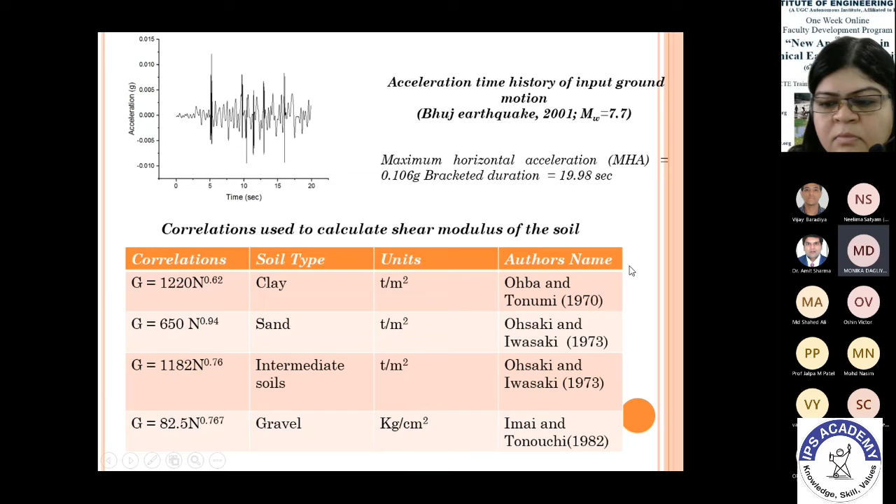So I have used a triangulation method and other GIS techniques for preparing hazard maps. The main motto of our study is to provide all types of hazard maps for this study area, so that design engineers can easily pick values for their designs. Visakhapatnam already has steel plants, port structures, and many other important structures. So whenever someone is going to design a particular building, our motto is to give them all the values.

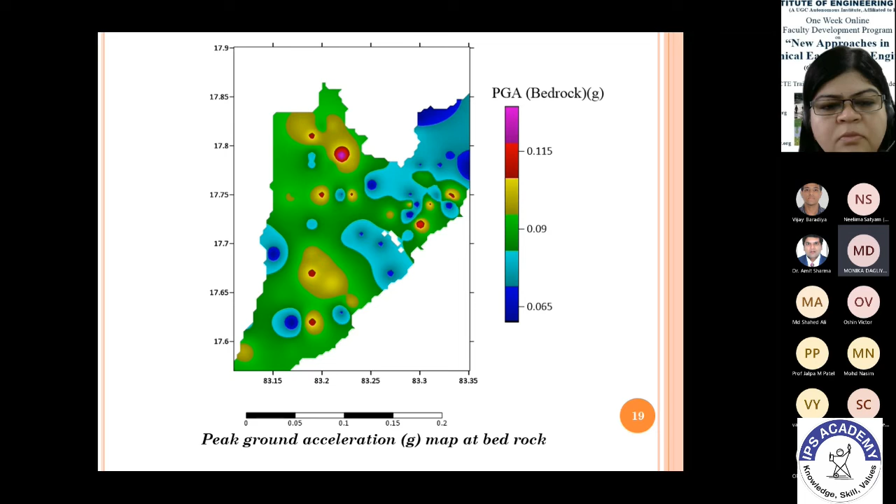Depending upon that too, depending upon the soil conditions, site specific conditions. So this is the PGA map at bedrock, and this amplification factor, which is a ratio of PGA at surface to PGA at bedrock. Okay, so if the amplification factor is 2.1, somewhere around here, that means whatever the ground motion intensity that is given at bedrock, as it has traveled from bedrock to the surface, it is almost amplified 2 times.

So these are some typical results from ground response analysis. As I have already said, a few locations have seen higher acceleration values when compared to the IS code. The amplification factors also range from 1 to 2.3. Wherever there are marine clays or some marine beds, the soil has the potential to increase the intensity of the ground motion to almost double it.

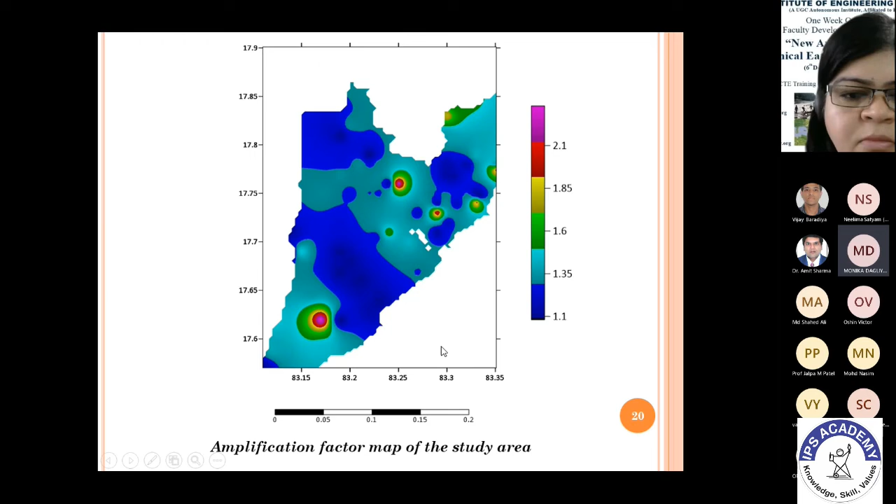Okay, so the locations present in the extreme southern part have shown higher response, because the southern part of this study area is on the coastal side, and there are a few marine beds and marine clays which amplify the ground motion. The northeast and northern part of the city have shown lesser response because of the presence of rock outcrops, that means hills; they have shown lesser PGA when compared to the other locations in the study area.

So this is all about ground response analysis. And as ma'am mentioned about micro tremor studies, this is also one part of studying local site effects. From this H/V method of micro tremor studies, we can find out the predominant frequency of the soil and the corresponding amplitude of the soil.

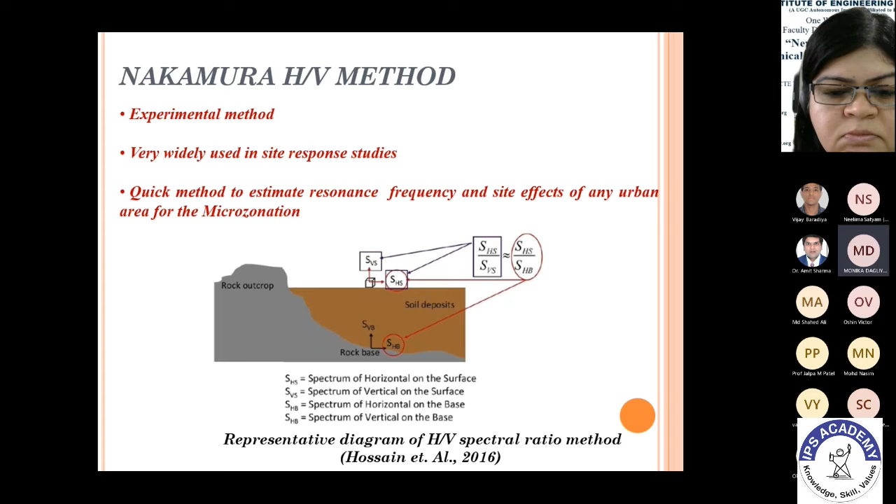This H/V method is given by Nakamura. Why we call it H/V is that it is the ratio of the two horizontal components to one vertical component of the ambient noise. As ma'am has said, there are some small micro vibrations which we cannot feel in the soil. The main motto of this Nakamura H/V method and microtremor studies is to study that ambient noise which we cannot see, and to find out the predominant frequency of the soil.

So here also we have taken randomly 75 to 80 locations in the study area. How we chose these locations is, we had already collected geotechnical data from different public and private organizations in the city study area. So based upon the availability of soil data, we have chosen these micro tremor study locations. This is the field setup in one of the test locations, that is at the park.

When we are doing micro tremor studies, we have to choose large open grounds. One more obstacle is we cannot do this testing in daytime, because we cannot mix the noises from passing vehicles or people walking with the micro tremors. We only want to study the micro tremors. That is why we have to choose large open grounds where there cannot be any disturbance by a passing vehicle or passing person.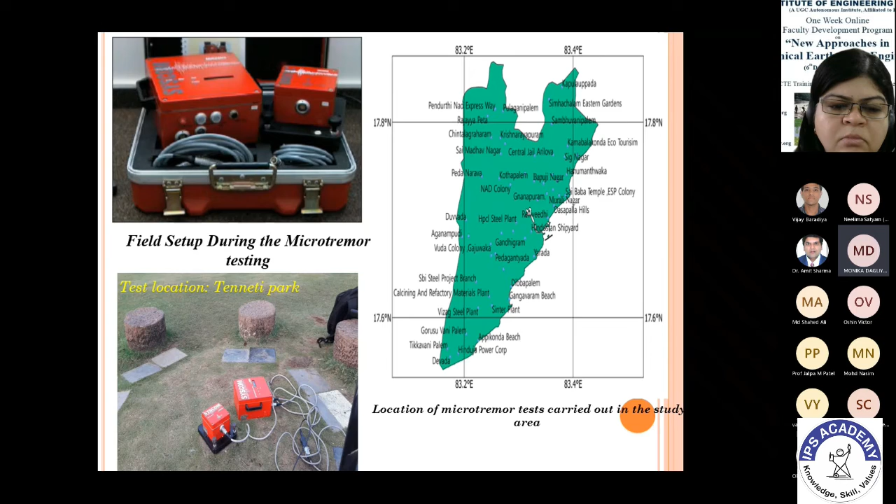If we are getting 60 signal files, one for each minute, we'll be excluding the first 1 or 2 minutes because of the disturbances we get. So after excluding those first 1 or 2 files, the remaining 58 files will be batch analyzed, and we'll be getting the frequency and amplitude spectra.

So based upon the frequency and amplitude spectra, we have divided the study area into 3 different zones, that is type 1, type 2 and type 3, where the fundamental frequency of the soil is greater than 4 Hz in type 1, 2 to 4 Hz in type 2 soils, and less than 2 Hz in type 3 soils.

And one more thing is, all the signal files are cut to a maximum frequency of 10 Hz, because when we are constructing, our interest is only up to a maximum frequency of 10 Hz, because no structure will be having frequencies higher than 10 Hz. So that is why we have cut the signal files up to 10 Hz.

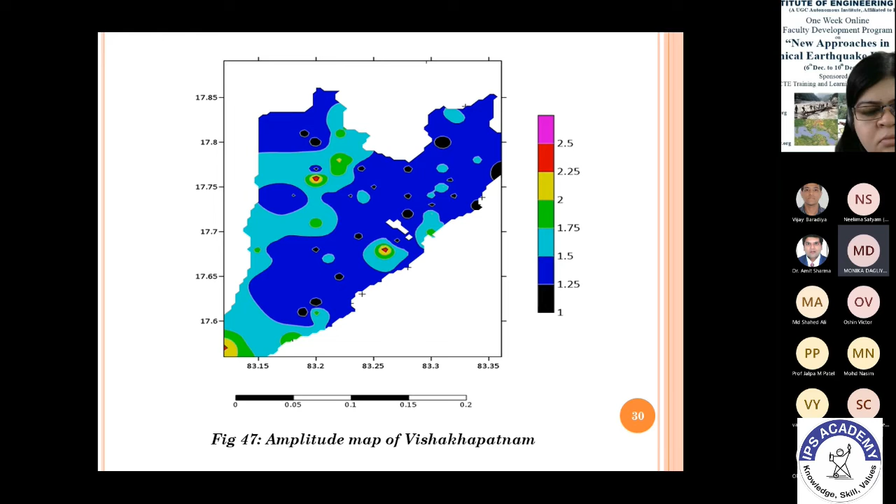Yes, based upon the H by V frequency value, I have prepared a hazard map, and this is the hazard map where we can pick the predominant frequency of the soil. And this is the amplitude map of the study area, where we can pick the amplitude of the soil. And yes, so why do we have to pick frequency values from this particular map?

If the predominant frequency, the fundamental frequency of the soil, coincides with the fundamental frequency of the structure which you have constructed, a resonance effect will occur, which will lead to huge damage during an earthquake. Okay, so that is the main motto why we have given peak frequency maps for this particular study area.

So while doing earthquake resistant designing, we'll be having a situation where we have to decide the critical height of the structure. So based upon the frequency of your structure and the predominant frequency of the soil, we can choose the critical height of the structure.

Structure height can be changed, whereas this particular fundamental frequency of the soil cannot be changed, right? So depending upon the fundamental frequency of the structure, we can decide the critical height of the structure.

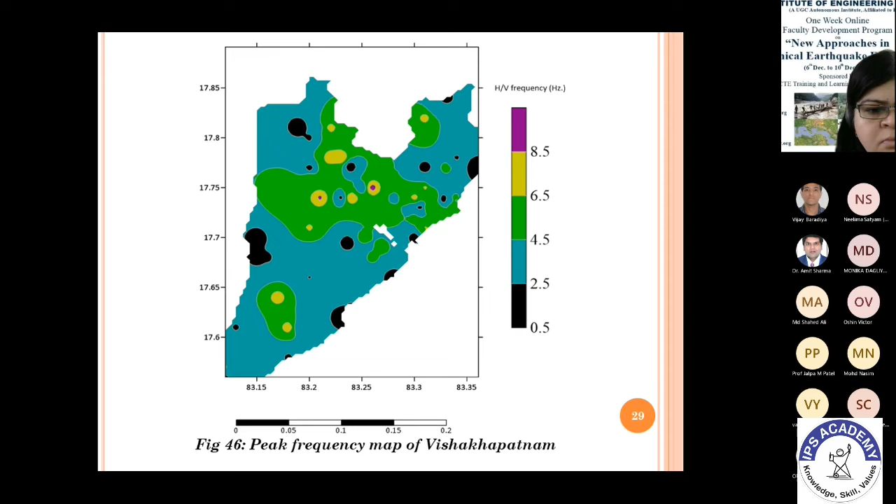So after that, we have proposed a frequency depth relation. Actually we have chosen some 35 locations where we already know the depth of the bedrock from the geotechnical bore log data which we have collected. Around 35 locations we have taken, and after fitting it linearly, we have got a frequency depth relation. So using this particular frequency depth relation, if we know the frequency, we can find out the depth of the bedrock at other locations also.

And here we have cross-checked the results, like how far this particular equation is feasible to use in order to find out the depth of the bedrock. And from the literature, we have found out a marginal error of 15% is acceptable. And mostly when we try to calculate the depth of bedrock for other locations also, we have seen that the marginal error is less than 15%.

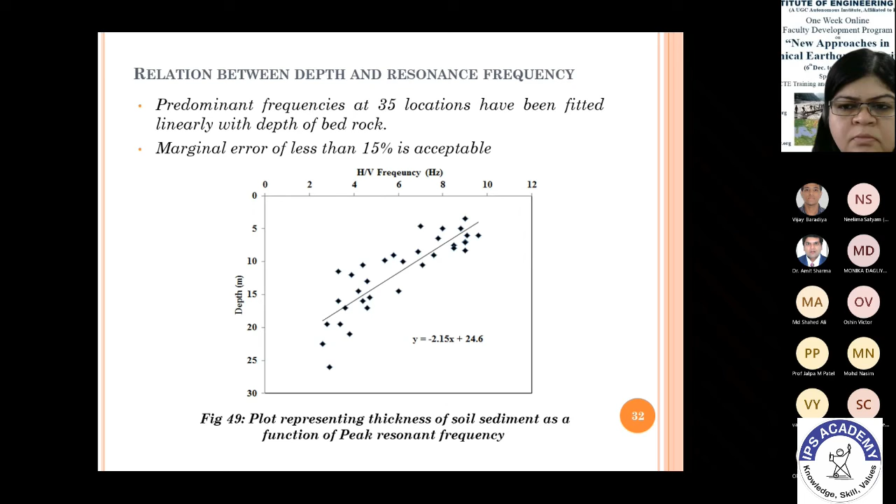So these are the few typical findings from the micro tremor testing. The frequency values are below 10 Hz, and how we have divided T1, T2 and T3 sites. Okay, so these are how we have decided the T1 sites and T2 sites, that is the sites with rock and gravelly soils. As I have already said in the previous study, the northern part of the city is having some rock outcrops. Here also, as you can see, the northern and central parts of the study are classified under T1 with the rock and gravelly soils with pebbles.

So few rock outcrops are found in northern parts of the study area, and similarly in southern and western parts, the frequency is between 2 to 4, where we found clay and silty sands. Okay. So less than 2 is found in the soft marine clay sediments, where higher amplitude values are found, and these are classified into T3 sites.

So the next one is liquefaction studies. So here, as we can see, the results from the ground response analysis and from the micro tremor testing are coinciding. As I have mentioned in the ground response analysis also, they are coinciding. We have cross-checked the results between the numerical analysis and the experimental part. Ground response analysis is completely the numerical part, which is done in the DEEPSOIL software. It is an open source software. And after that, in the micro tremor testing also, we got coinciding results, the results matched.

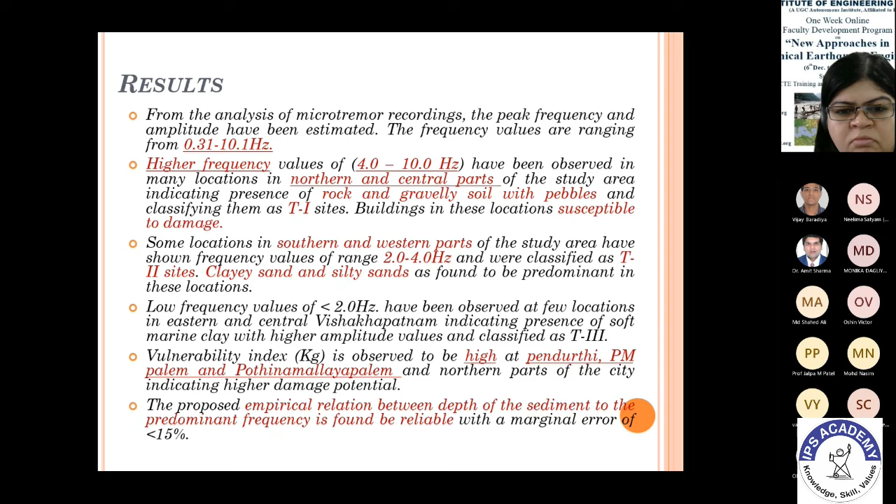After that, it is liquefaction studies. Here we have done liquefaction studies both in the stress based approach as well as the energy based approach. Most of us know liquefaction potential assessment can be done using the stress based approach, which is proposed by Seed and Idriss in 1971 and 1981, and after that it was modified and improved by many researchers, and we have followed the procedure given by Idriss and Boulanger in the year 2004. That is the most recent version of the stress based approach after Seed and Idriss. So the method followed is the Idriss and Boulanger method.

Here, as we already know, the stress based approach is nothing but where we'll be finding out the cyclic resistance ratio to the cyclic stress ratio, CRR by CSR. So here in this study, as we already know, we can randomly pick a peak ground acceleration of 0.1 g in this liquefaction analysis directly from the IS code.

So instead of doing that, we already have the site-specific peak ground acceleration values from ground response analysis, which is the first part. So we have picked PGA values from that ground response analysis study, and we have done liquefaction assessment, so the results will be accurate. Instead of using the codal provision value 0.1 g for all the locations, we have taken PGA values from the GRA, that is ground response analysis, for each location, and we have done liquefaction potential assessment.

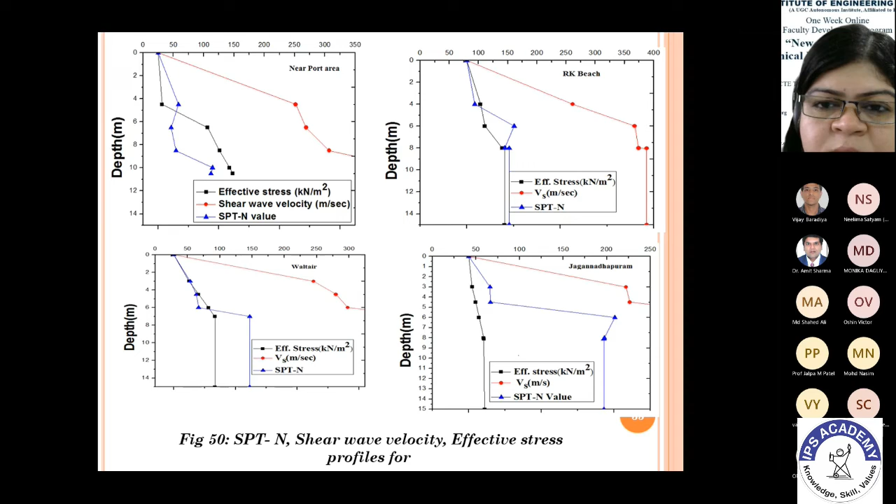So these are the few plots which are showing effective stress, SPT N values and shear wave velocity values. And this is the liquefaction hazard map using the stress based approach.

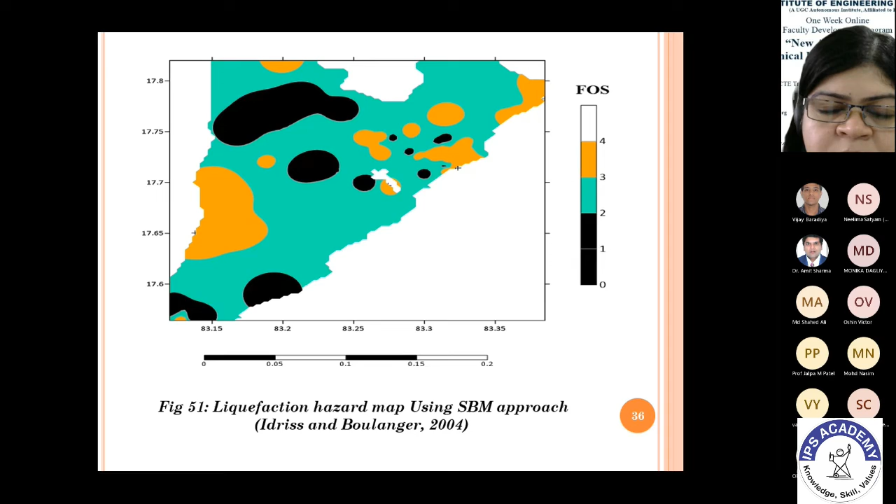So here also we can find out the locations which are liquefiable and which are not. And the next one is the energy based approach. This is a bit new when compared to the stress based methods, which we already know. Stress based methods are the conventional methods which have been followed for a long time, whereas energy based methods are recently formed and recently in use, and this method can be used to cross check SBM. It is not mandatory to cross check SBM, but we can validate the results actually.

So this energy based method of liquefaction potential assessment is completely based on the energy released from a seismic wave. When we have an earthquake, whatever the energy released, upward energy from the bedrock to the surface, it is the ratio of energy released to the energy dissipated, like how much amount of energy is released to how much amount of energy is dissipated. If more energy is dissipated, there will be less chances of liquefying the soil. If very less energy from the seismic wave is dissipated while traveling from the bedrock to the surface, then there are higher chances of liquefaction, which obviously results in damage to the structure. So that is the main concept in this energy based method.

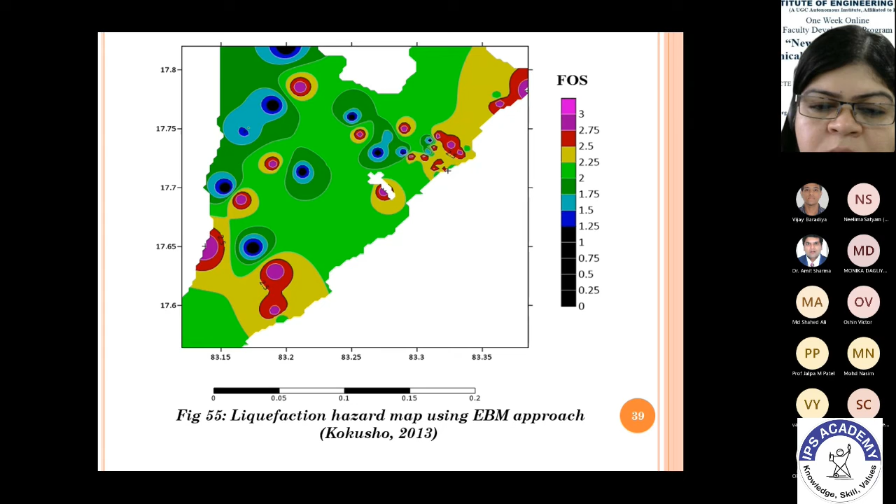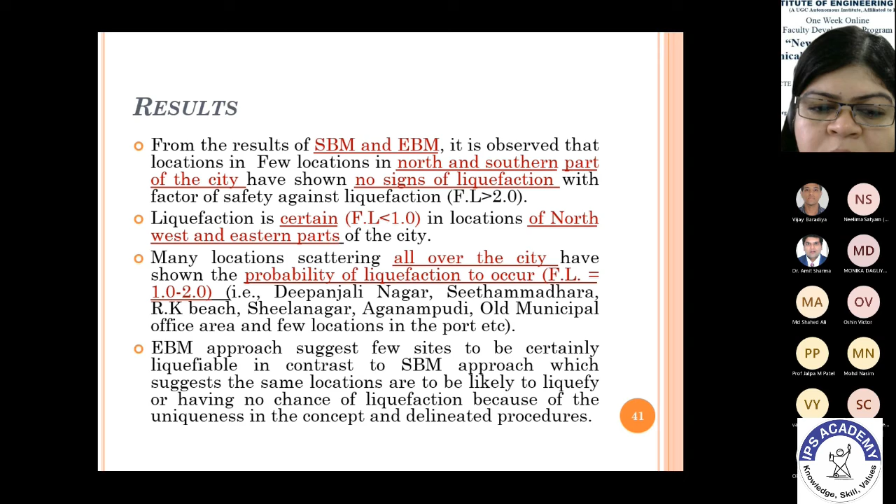So these are some typical results from both the stress based approach and energy based approach. So finally, we have done seismic hazard assessment, that is probabilistic seismic hazard assessment, and then we have provided some preliminary microzonation maps. Microzonation maps in the sense the peak ground acceleration maps, predominant frequency of the soil maps, amplitude maps, vulnerability index, liquefaction; all these are the preliminary microzonation maps which can be used for general planning and disaster management as well. And these will be helpful in identifying the sites with higher ground accelerations.

So coming to the application of all these dynamic site characteristics: the predominant frequency, the peak ground acceleration of the study area, as well as the site specific peak ground acceleration from ground response analysis, and amplitude values. These values are given as input, and we can construct a site specific response spectrum. I can show you here.

Yes. This is the site-specific response spectra given by IS 1893 for the maximum credible earthquake and design based earthquake, which are level 2 and level 3. These MCE and DBE curves are taken based upon the site-specific values. Here I have used Eurocode 8 for constructing response spectra for this particular site of Vishakhapatnam. That is for the maximum credible earthquake level, level 3, and design based earthquake, level 2. Okay, so for level 2 and level 3 earthquakes, we have constructed site specific response spectra.

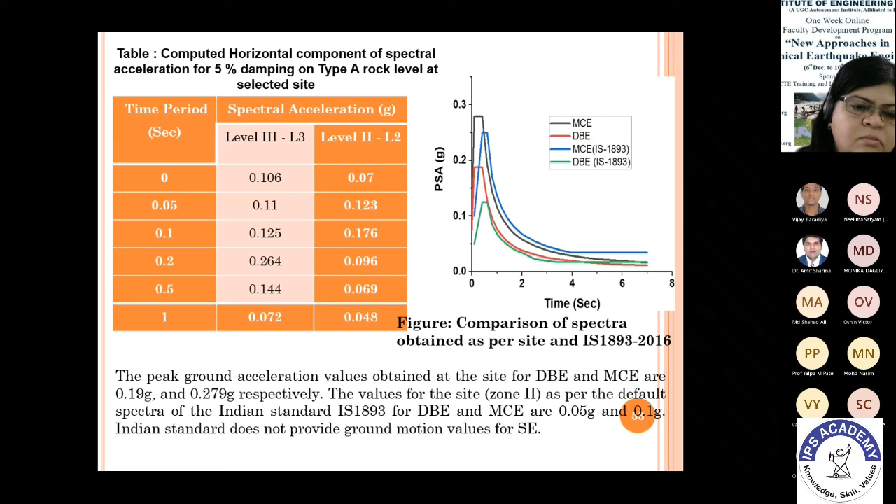Based upon this site specific response spectra, I have taken them as input and used the USGS earthquake database, and found ground motions which can be connected to my site. Based upon this response spectra, I found the ground motions which can be used for my site, and we have done time history analysis as well as pushover analysis for the wharf structure.

So this is the wharf structure which we have taken. As you can see, the diameter of the piles as well as the main beam and all.

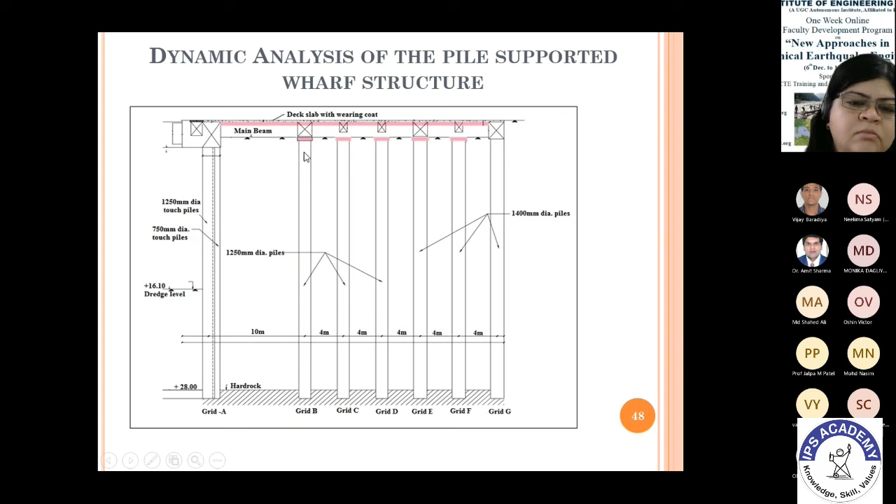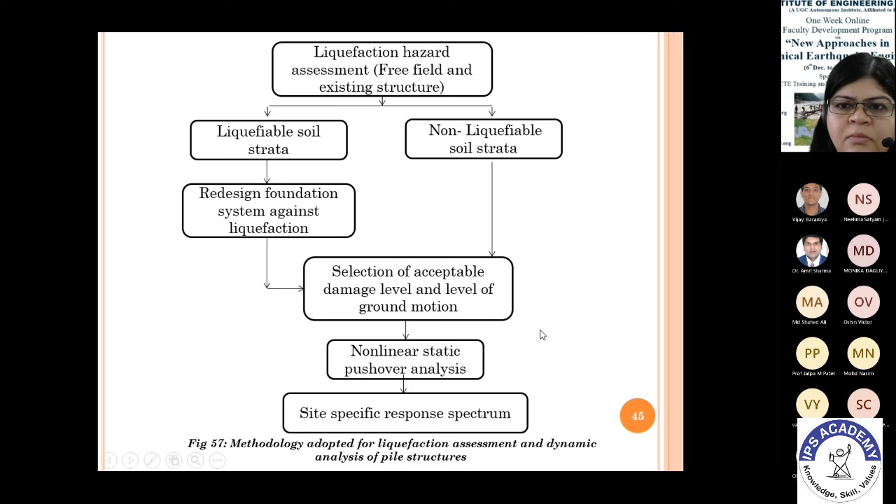So with this, maybe I can stop my presentation. Okay madam, next, Nishita. Ma'am? Yes. Ma'am, there are certain questions.

Yes ma'am. What is the reason behind less energy dissipation areas having more liquefaction? Please explain. Obviously, whenever we have seismic energy traveling from the bedrock to the surface, if more energy is dissipated by the soil, when it comes to the surface we'll be having a lesser amount of energy, and obviously liquefaction will be lesser, right?

The seismic energy amount released at the bedrock, while traveling from the bedrock to the surface, depending upon the soil site conditions, either the energy is dissipated or the energy is increased. If it has a soft soil bed, the energy will be amplified, the seismic waves will be amplified - meaning more energy will be traveling to the surface, resulting in higher chances of liquefaction. But when more energy is dissipated, only a little amount will be traveling to the surface, which lessens the chances of liquefaction in that area, depending upon the soil strata present between the bedrock and the surface.

If the soil strata is soft and has a tendency to amplify the seismic waves and increase the seismic energy, it will result in higher liquefaction chances. When the soil strata is stiff, something like rock or stiff gravel, then it will be dissipating the energy, so liquefaction chances will obviously be lessened.